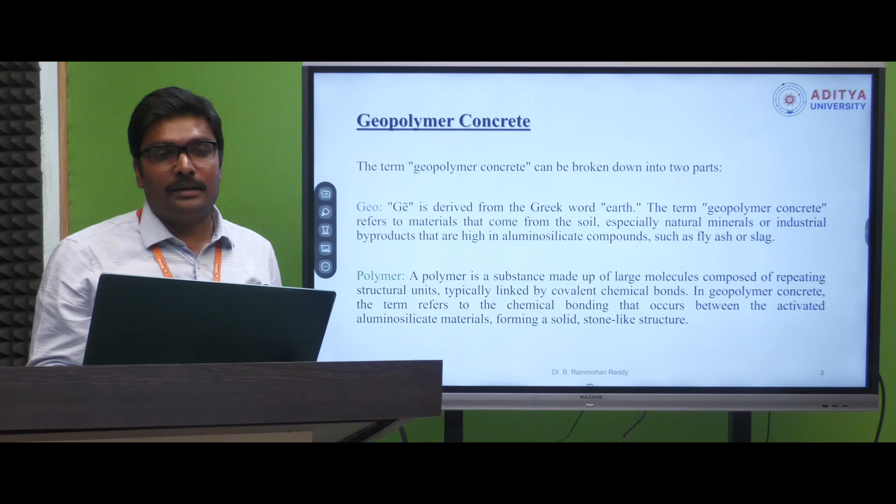And the second term indicates polymer. It's like a polymer substance made up of large molecules of repeating structural units, typically with covalent chemical bonds. In geopolymer concrete, the term refers to a chemical bonding that occurs between activated aluminosilicate materials, like industrial byproducts, to form a solid structure like stone. That's what together we are calling geopolymer concrete.

And these are the contents we are going to discuss in this presentation on geopolymer concrete.

Coming to the need of geopolymer concrete, cement is one of the most frequently used construction materials, and India's cement production has increased from 230 million tons in 2011-12 to 380 million tons in 23-24. So the production of cement has increased drastically, from 230 million tons in 2012 to 380 million tons.

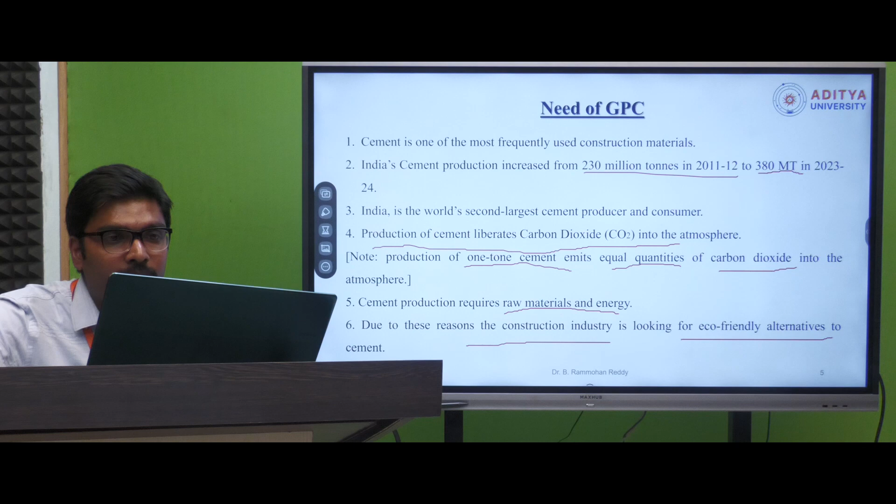India is the second largest cement producer, and production of cement liberates carbon dioxide into the atmosphere. 1 ton of cement production emits 1 ton, equal quantities, of carbon dioxide into the atmosphere. So the entire cement industry is looking for eco-friendly alternative materials to cement. Cement production also requires a lot of raw material and external energy, so the industry is looking for alternative cementitious materials. This flow chart indicates in how many stages the carbon dioxide is liberated into the atmosphere.

In the calcination process, we need to give external energy, and at that time carbon dioxide is released into the atmosphere. Second, grinding the clinker also requires external energy, and at this stage too carbon dioxide is released. Put together, these two stages mean around 1 ton of cement production liberates an equal quantity of carbon dioxide into the atmosphere.

Because of these environmental concerns, the cement industry is looking for alternative cementitious or binding material required to produce concrete. Most researchers suggest geopolymer is one such alternative material to conventional concrete.

As civil engineers, we should be concerned about global warming. We need to mitigate it, and geopolymer will be that alternative substance to conventional concrete, to reduce global warming.

Coming to the introduction of geopolymer concrete: it is an innovative, eco-friendly construction material that replaces cement in concrete. In some concretes like PPC concrete or slag concrete, we can replace only a part of the cement. But in geopolymer concrete, we can replace the binder, cement, 100% with an industrial byproduct or industrial waste material. Also, the hydration process that occurs in Portland cement requires water.

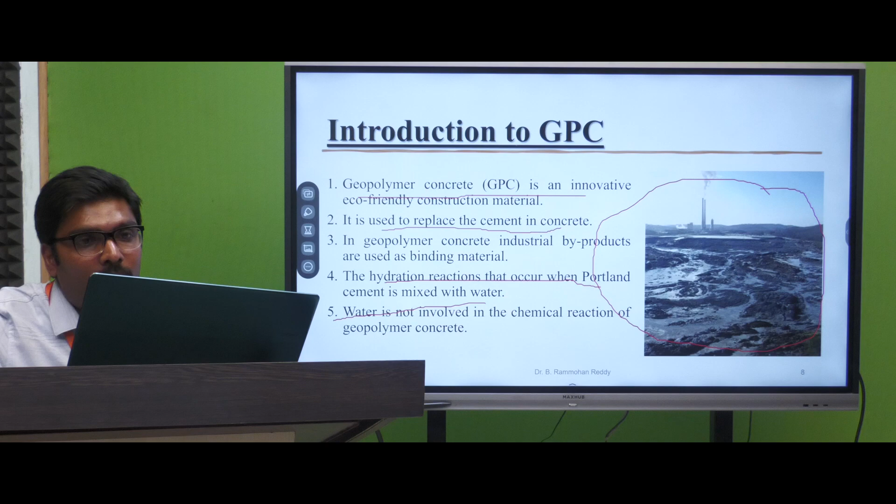If you see this diagram, this is an ash pond. The image is taken at one of the NTPC, National Thermal Power Corporation sites, where you can see fly ash being dumped on open land, creating environmental issues like polluting the ground, surrounding vegetation, groundwater, surface water, and air. So utilizing fly ash in a sustainable way, geopolymer concrete is the solution for it.

According to the literature, Professor Joseph Davidovits introduced geopolymer concrete in the 1970s. In a paper titled 'Geopolymer Cement,' he used different types of geopolymer cements with different industrial byproducts, and concluded that fly ash based geopolymer cements reduce CO2 emission by up to 90%, because we are not using ordinary Portland cement here, we are using fly ash as a replacement to produce concrete, so that we can control the emission of carbon dioxide into the atmosphere.

In another study on mechanical properties of fly ash based geopolymer concrete under oven and ambient curing, it was concluded that 100% fly ash based geopolymer samples showed better properties under elevated temperature. Most researchers present that 100% fly ash based geopolymer concrete gives better results at an elevated temperature of 40 to 80 degrees centigrade.

In another study on long term and short term properties of geopolymer concrete, it was concluded that higher concentrations of sodium hydroxide solution resulted in higher strength and durability compared to OPC. So the concentration of NaOH also plays a major role in attaining enhanced strength and good durability properties in geopolymer concrete. Many researchers have thus elevated geopolymer concrete as an effective alternative to conventional concrete.

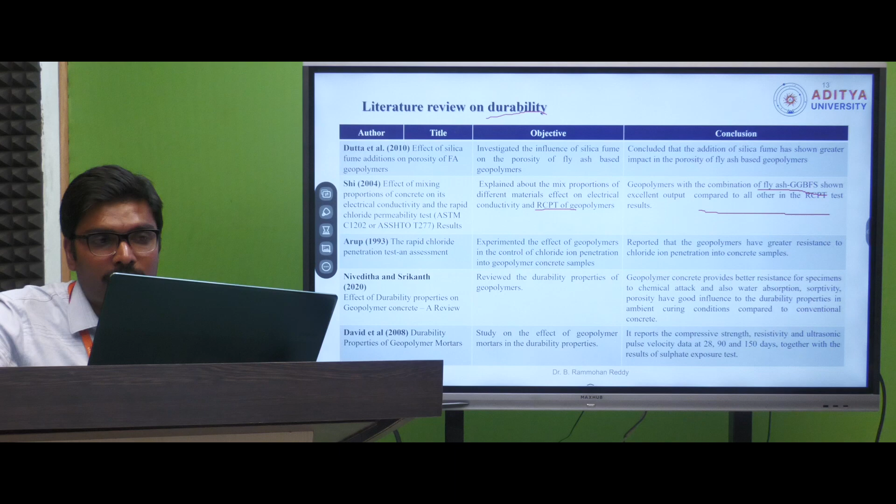And how all these factors will affect the microstructural studies will be presented by various authors, and how the formation of NASH and CASH gel, all these things we will see in the coming slides. And what are the durability properties? Not only short term strength, most of the studies show geopolymer concrete will produce better durability properties compared to conventional concrete. They presented RCPT results, and concluded RCPT results are good when fly ash is combined with GGBS in the production of geopolymer concrete. Many authors have clearly explained the durability properties of geopolymer concrete are much better compared to conventional concrete. So similarly, what are the practical applications?

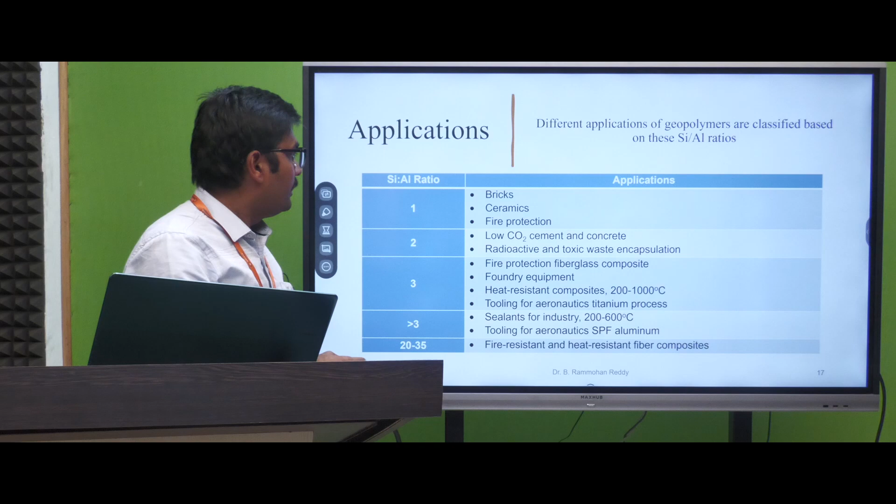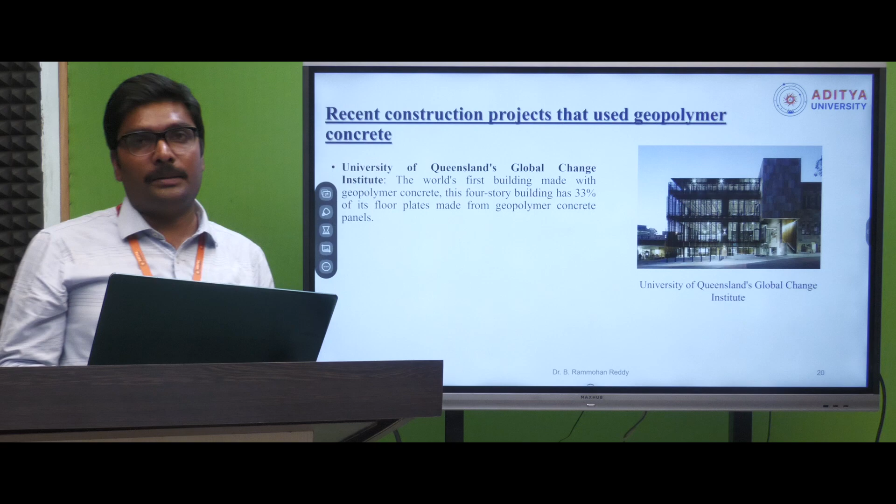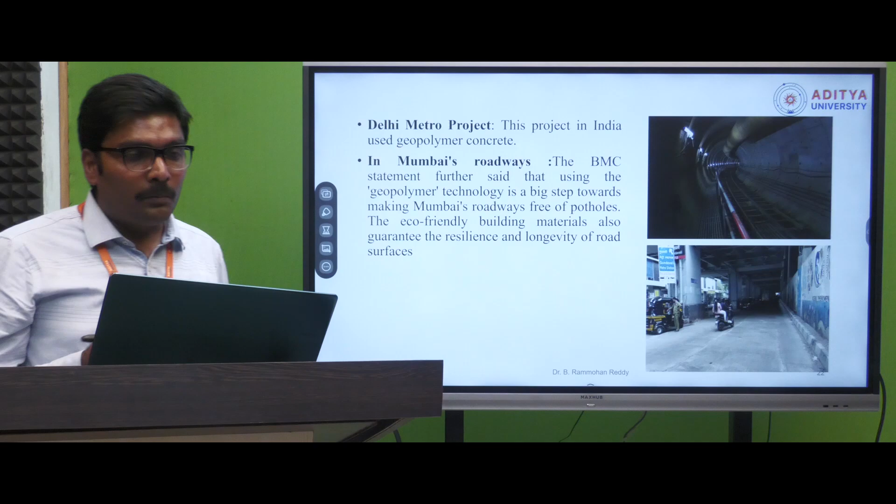Most researchers are confused about the difference between alkali activated concrete and geopolymer concrete. Davidovits clearly explained that geopolymer concrete is different and alkali activated concrete is totally different, because the binders used in alkali activated concrete are industrial byproducts such as fly ash, slag, metakaolin. But in geopolymer concrete, we use aluminosilicate materials, materials which are rich in aluminosilicate. The activator solutions are the same, either sodium based solutions like sodium silicate, sodium hydroxide, or potassium based solutions, potassium silicate and potassium hydroxide, used as activator solutions. Similarly in GPC also we use these.

In the activation process, these key points play a major role. Dissolution of silica and alumina from the industrial byproducts chosen will play a major role and produce a cementitious matrix, through polymerization and gelation. But here we call it a 3-dimensional aluminosilicate network. So simply we call it geopolymerization, and it will produce a rigid amorphous to semi-crystalline network.

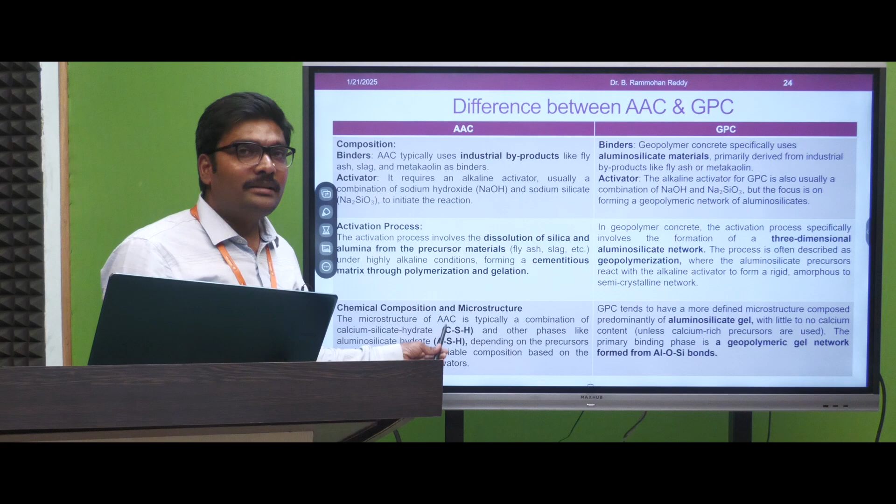Chemical composition and microstructure: if you see the difference between AAC and GPC, CASH and NASH gels will form. CASH is nothing but calcium silicate hydrate, where if you use slag or calcium rich materials as binders, then CASH gel will be produced, which we can identify through microstructure. And NASH, where we use silica and alumina rich materials, NASH will be produced. Similarly, in the microstructure we analyze the geopolymer gel network that is formed from alumina and silica bonds. That is the major difference in the microstructure of geopolymer and alkali activated concrete.

Coming to the difference between ordinary Portland cement and geopolymer cement. This is a major point everyone should know. The various points I have presented here.

For binding material: in geopolymer concrete, alkali activated aluminosilicates like fly ash, slag or industrial byproducts are used as the binding material. In conventional concrete, ordinary Portland cement is the binder.

The primary ingredients used in geopolymer concrete are industrial byproducts such as fly ash, ground granulated blast furnace slag, and alkali activators such as sodium based or potassium based materials. In conventional concrete, we use cement, natural or artificial aggregates, water, and admixtures for better workability.

Regarding CO2 emissions, a major advantage why people are looking for geopolymer concrete is its environmental benefit - carbon dioxide emissions are significantly lower due to absence of cement, compared to ordinary Portland cement.

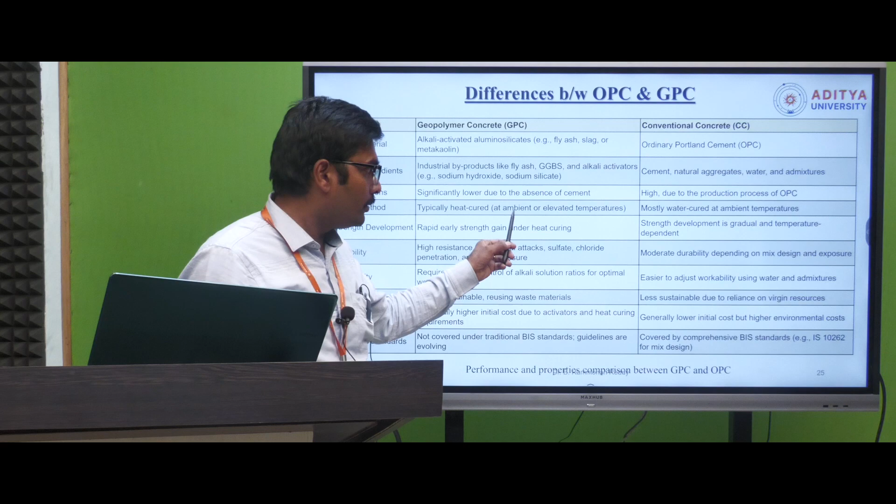For curing method, in geopolymer concrete curing plays a major role in attaining strength. We can go for either ambient temperature or elevated temperature curing based on environmental conditions and the place of production. The binders used also help decide whether we go for ambient or elevated temperature curing. But with OPC, we need to go for water curing in most cases.

Strength development in geopolymer concrete is rapid, and early strength is attained with heat curing. In conventional concrete, strength development is gradual and also temperature dependent.

Coming to durability, compared to conventional concrete, geopolymer concrete has better resistance to chemical attack, chloride penetration, and acid exposure. So geopolymer concrete produces better durability.

Coming to workability properties, there are many factors that can increase or decrease workability in geopolymer concrete. In conventional concrete, we can adjust workability by adding admixtures or additional water content.

Compared to conventional concrete, geopolymer concrete is more sustainable because we use industrial waste materials in its production. Cost is also one of the important factors people look for.

The initial cost of geopolymer concrete is a little high because activator solutions need to be purchased, while the initial cost of conventional concrete is less. But since geopolymer concrete is more durable, in the long run we can reduce maintenance costs.

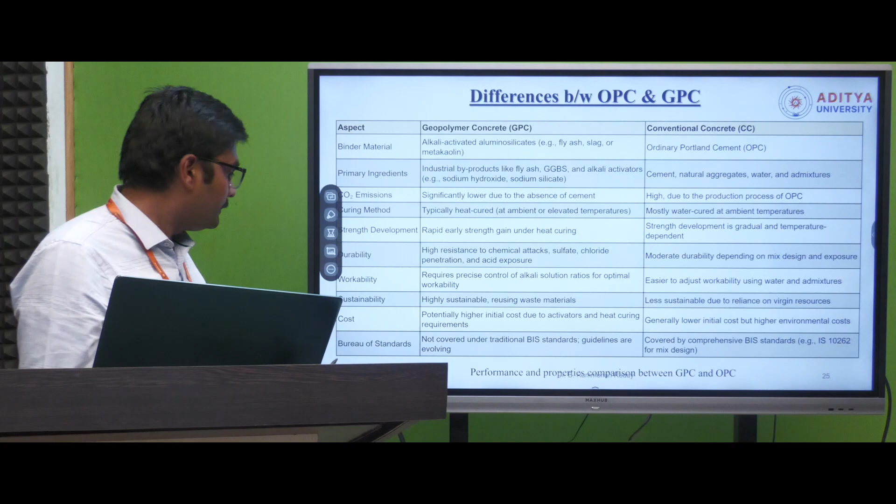Coming to standards, for geopolymer concrete there is still no proper Indian standard guideline for mix design or other properties. But we all know IS 10262 is the standard for mix design of conventional concrete.

Regarding the importance and applications of geopolymer concrete, in the 1970s itself the term geopolymer was introduced by Joseph Davidovits, who presented that utilization of industrial byproducts would reduce carbon dioxide emissions produced during cement production. It is an environment friendly material, and the entire cement and construction industry is looking for such materials.

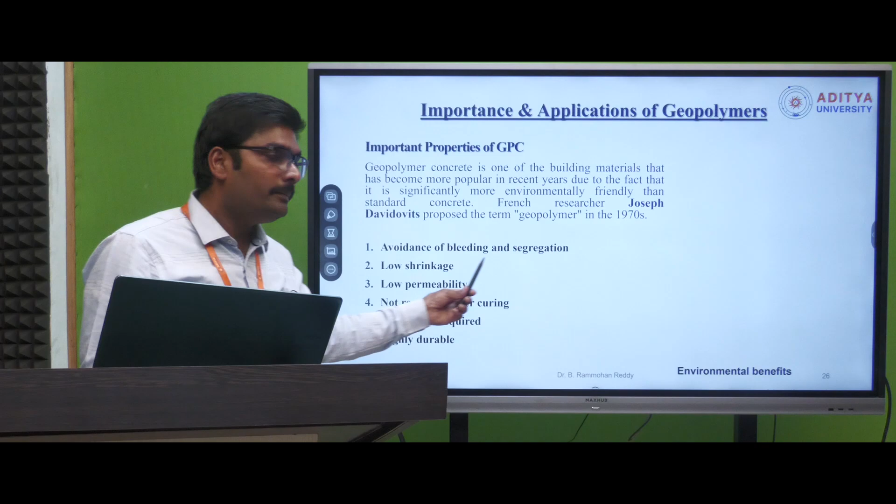By using geopolymer concrete, we can avoid bleeding and segregation, achieve low shrinkage, low permeability, and it does not require water curing. Strength can be achieved as required, based on the proportions of industrial byproducts and alkaline solution properties chosen. It is also highly durable compared to conventional concrete.

Coming to environmental concerns, geopolymer concrete reduces industrial waste, since in many industries waste is dumped on open land creating environmental issues, which can be avoided by utilizing that waste in concrete production. It is eco-friendly and sustainable, reduces carbon dioxide emissions, and thereby reduces global warming caused by cement production.

These are the materials used in the production of geopolymer concrete, as mentioned earlier - either sodium based or potassium based: sodium silicate or sodium hydroxide, potassium silicate or potassium hydroxide. Many researches present sodium based activators being used due to economic considerations, and these aluminosilicate materials are used as the primary binder material in geopolymer concrete production.

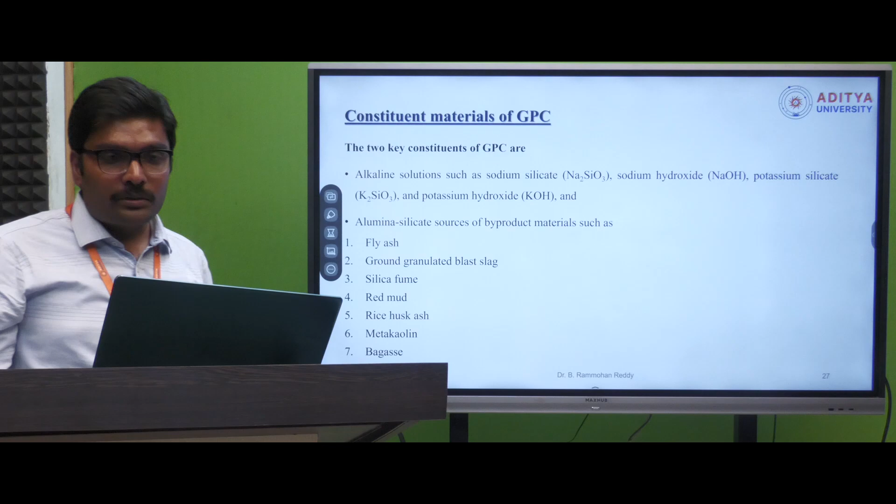So now we are going to see each and every industrial byproduct.

For example, fly ash, we all know fly ash is a byproduct which is produced in coal based thermal power stations, and it is rich in silica and also alumina, so that it is more suitable in the production of geopolymer concrete.

There are two classes of fly ash, class F and class C. Class F fly ash requires an activator to become a cementitious material, so that's what we are using here, the activator. Class F fly ash is a low calcium fly ash. Class C fly ash has self cementing properties because it has more calcium content, and it is a pozzolanic material.

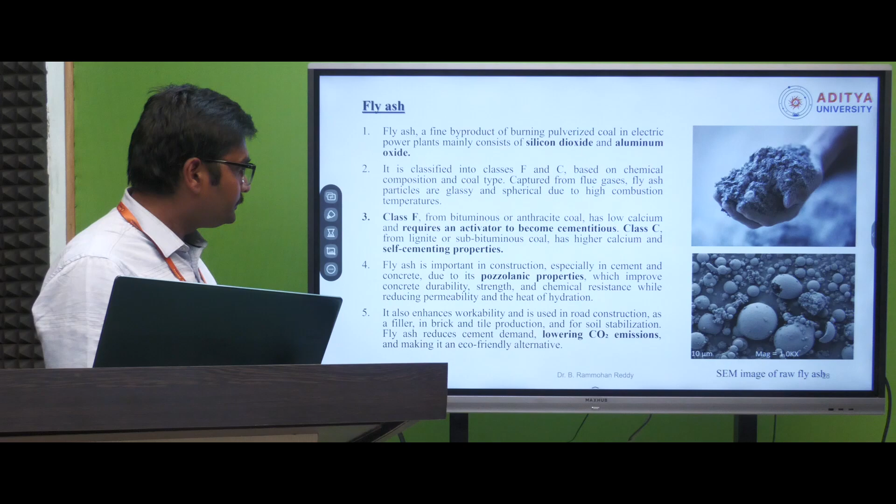By utilizing fly ash in the production of concrete, we are lowering the carbon dioxide emissions into the atmosphere and making the concrete an eco-friendly alternative to conventional concrete.

Coming to another industrial byproduct, ground granulated blast furnace slag, we can also call it GGBFS, or simply slag. It's like a glassy granular material ground into a fine powder, that's what we call ground granulated blast furnace slag. It is the byproduct produced in the making of steel, and we can utilize this byproduct in the production of geopolymer concrete.

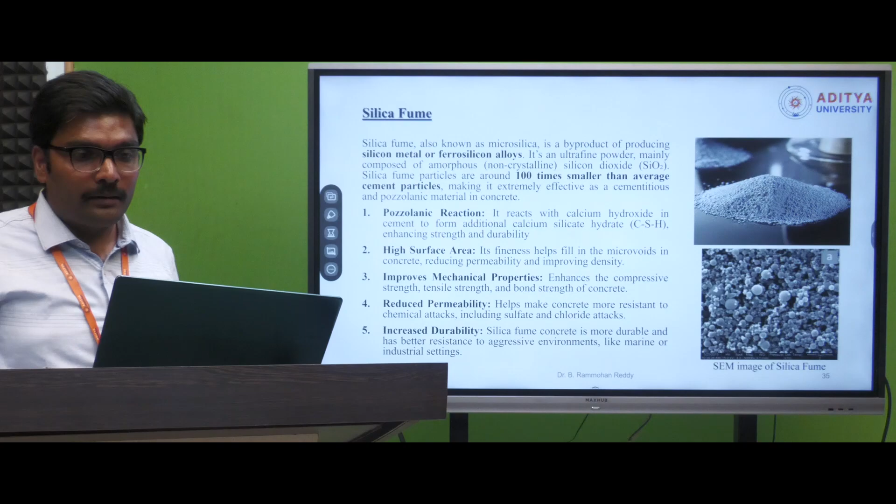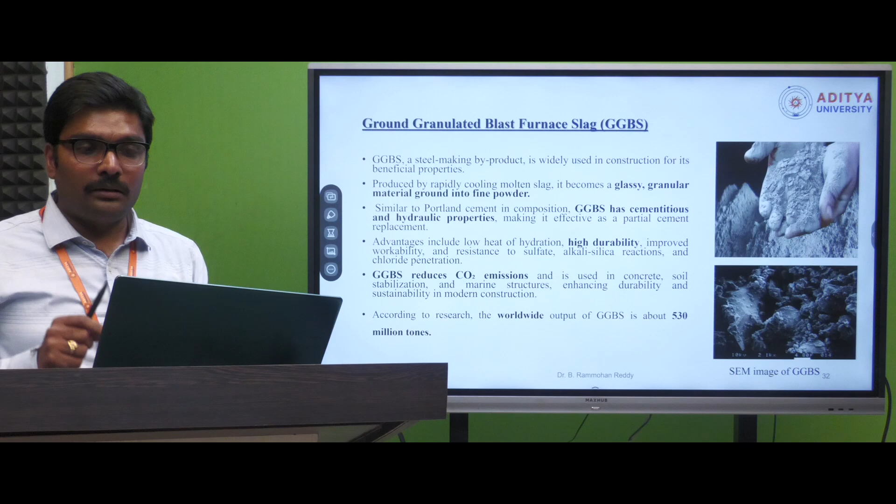So many researchers have found that the combination of fly ash and GGBS gives better results, because in between the fly ash particles, the GGBS particles will settle, and proper bonding is produced.

Coming to another industrial byproduct, red mud. It is from the bauxite residue in the production of alumina. Red mud is the waste material, and the utilization of red mud will give more environmental benefits, since environmental challenges are there. Red mud is one of the byproducts which we can use in the production of geopolymer concrete.

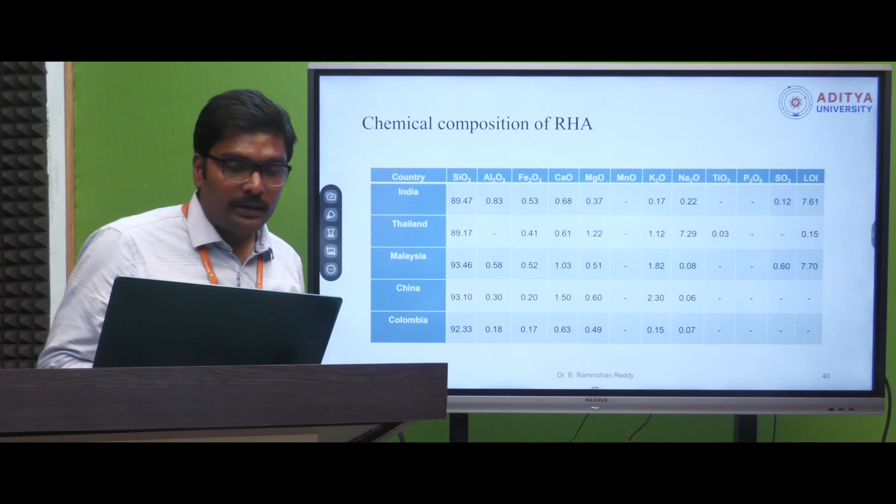It's an environmentally friendly material which we can use in the production of concrete. Looking at the chemical composition, silica content is more in rice husk ash.

Another byproduct, sugarcane bagasse ash, is the residue left after extracting juice from sugarcane. Utilizing this is also environmentally friendly, and it has pozzolanic properties because of high silica content, and the particle size and specific surface area of this material is high.

Particle size is less and specific surface area is high, so we can utilize this. If sugarcane bagasse ash is used in the production of concrete, it will give a durable structure.

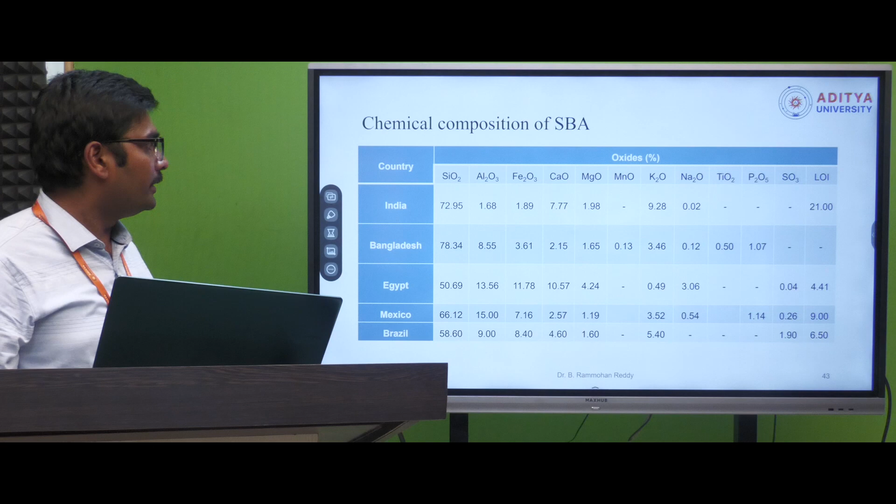The chemical composition of sugarcane bagasse ash shows silica content is more, and alumina content, iron content as well as calcium content is also more. This varies from country to country because of the sugarcane production.

So if you use these byproducts in the making of concrete as a partial replacement, it will give a better dense structure, so that automatically the strength and durability properties of the structure will be increased.

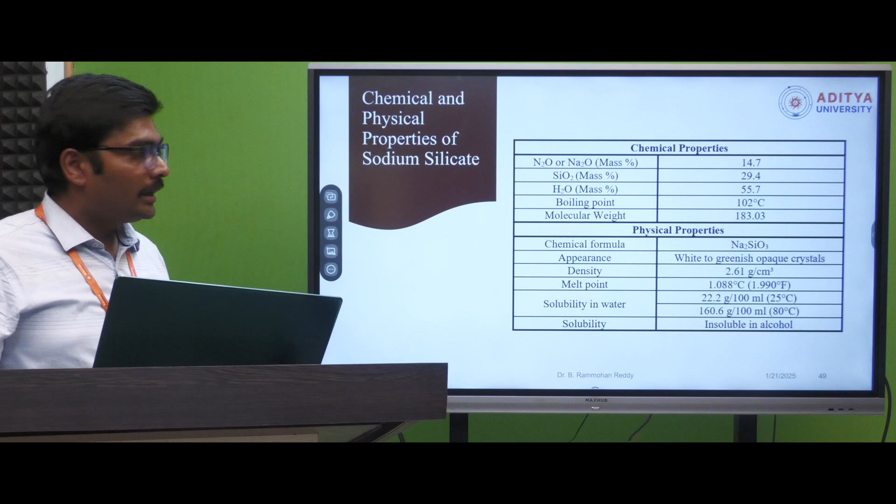This is the chemical and physical properties of sodium silicate. So Na2O mass percentage, SiO2 and water content, and the boiling point — all these factors we will see.

Now coming to molarity, in sodium hydroxide molarity plays a major role, as discussed in the previous slide. So if we need some molar, either 6 molar or 8 molar sodium hydroxide solution, how to prepare it you can see here. The concentration of alkaline solution is the factor, and sodium hydroxide has a molar mass of 40 grams per mole.

To produce a 12 molar solution, for example: 1 liter of water plus 40 grams of NaOH gives a 1 molar solution. Similarly, for 12 molar, we multiply 40 grams by 12, so 480 grams of NaOH pellets need to be added for 1 liter of water to produce a 12 molar solution. According to whichever molarity we need, we add the sodium hydroxide pellets accordingly.

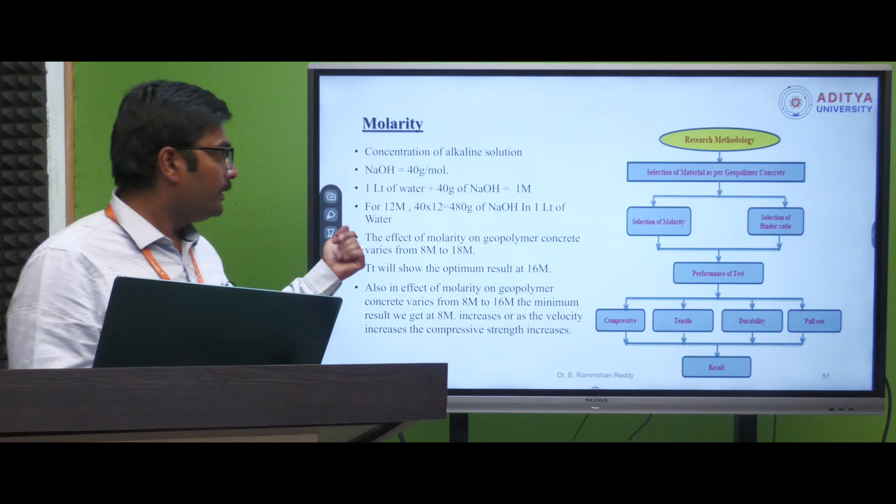But we need to take care while adding sodium hydroxide pellets, because it produces heat while adding, so it's better to check that and add carefully.

In this slide, water, sodium hydroxide and sodium silicate combine to give the alkaline solution. It produces heat up to 80 degrees Celsius, so we need to store this solution in a cool place, and while preparing the sodium hydroxide solution we need extra care and use it after 24 hours.

This is also a major point: if you plan to cast the samples today, or use geopolymer concrete in construction today, you need to prepare this alkaline solution 24 hours before.

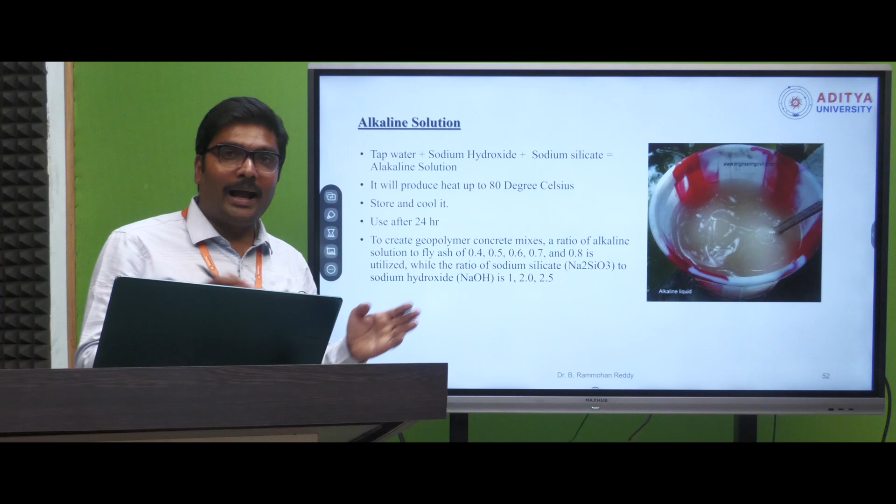While preparing the alkaline solution, first we decide the molar ratio of sodium hydroxide, and according to the molar we add water and sodium hydroxide pellets to produce the sodium hydroxide solution. Then we go to sodium silicate, adding it according to the proportion needed, either 1:1, 1:2, or 1:2.5, combining both sodium hydroxide and sodium silicate solutions to produce the alkaline solution.

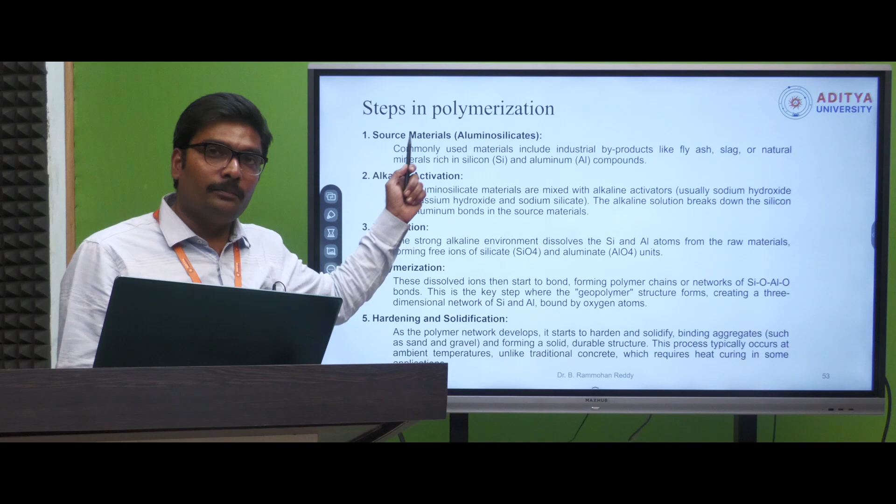This slide presents the steps in geopolymerization. Many researchers have highlighted the geopolymerization process, similar to how we study the hydration process in conventional concrete. In the same fashion, we need to understand geopolymerization, because strength is attained based on this process. The first step is source material selection.

In geopolymer concrete, we need to select source material rich in aluminosilicates. The second step is alkaline activation - the alkaline solutions we use, either sodium based or potassium based, play a major role in the formation of the geopolymeric chain.

The next important step is the dissolution stage. The strong alkaline solution dissolves silica and alumina atoms from the raw material. The raw materials we use, which are aluminosilicate byproducts, contain strong alumina and silica, and these release free ions of silicate and aluminate. In the next slide I will show how these free ions form.

The next stage is polymerization. The dissolved ions of silica and alumina rearrange and form bonds through oxygen atoms. A polymer chain forms as a network of silica oxide and alumina oxide. This chain bond formation is a crucial step for attaining strength.

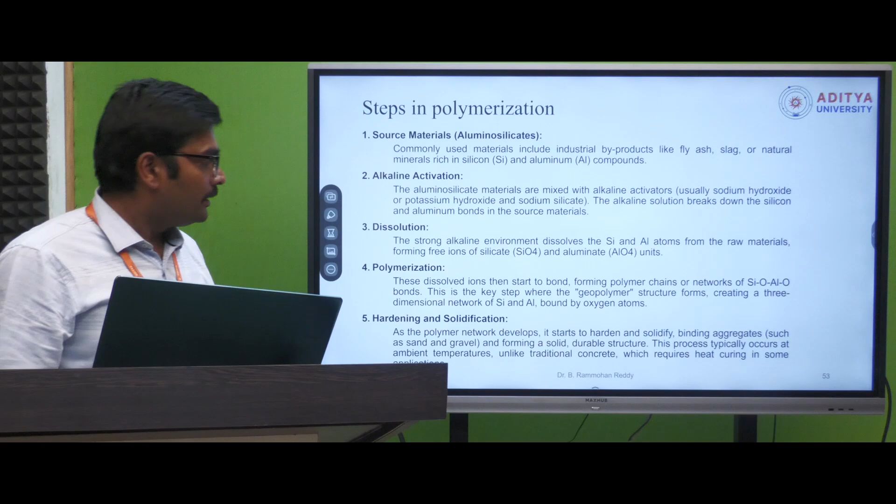Next is hardening and solidification. In this stage a three-dimensional geopolymeric network forms, producing a solid durable structure. This typically occurs at ambient temperatures as well as at heat temperatures. These are the different steps involved in geopolymerization.

In the next slide I will explain this more clearly along with the chemical formulas. The first two steps, selection of source materials and alkaline activator, we already know. The remaining three steps are the most important in the geopolymerization process.

In the dissolution stage, aluminosilicate precursors like industrial byproducts react with the alkaline solution and release silica and alumina monomer ions. The equations show the aluminosilicate forming alumina and silica monomers in this first stage. In the next slide I will also present a video for more clarification.

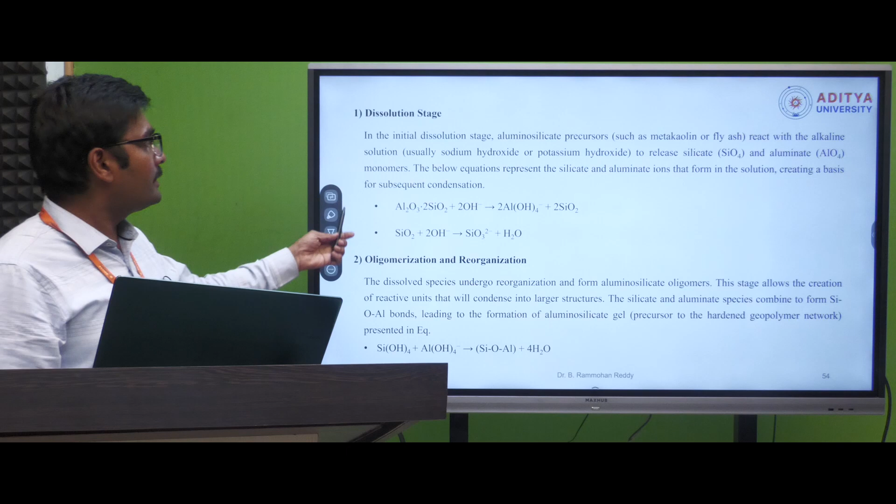In the second stage, oligomerization and reorganization, the monomers divided from the aluminosilicate material in the presence of alkaline solution rearrange to form silica and alumina bonds, creating a polymeric chain. That is what we call a geopolymer - a polymeric chain forms here.

In the next stage, this geopolymeric chain process forms a 3-dimensional network, which plays a major role in producing better durable concrete. These are the chemical reactions produced during this polycondensation, or hardening stage.

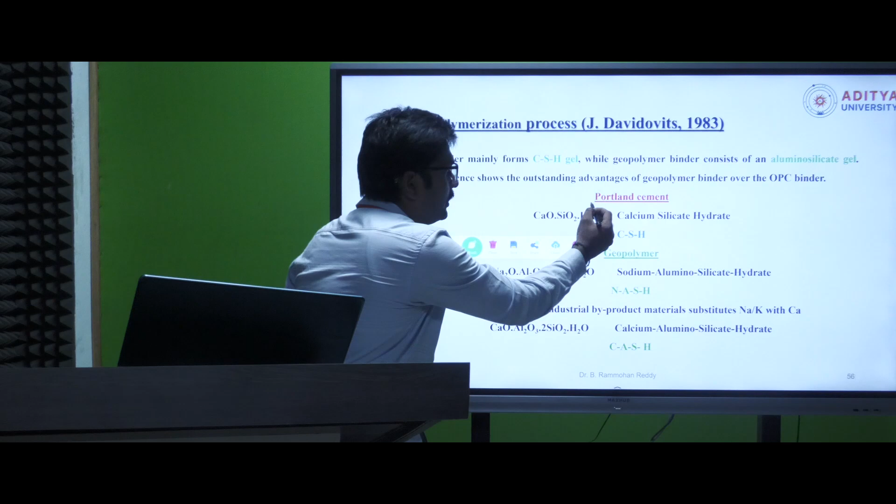This slide presents the geopolymerization process. We all know that in conventional Portland cement, calcium silicate hydrates play a major role in strength attainment. Similarly, in geopolymer concrete, based on the industrial byproduct we choose, either N-A-S-H gel or C-A-S-H gel will be produced.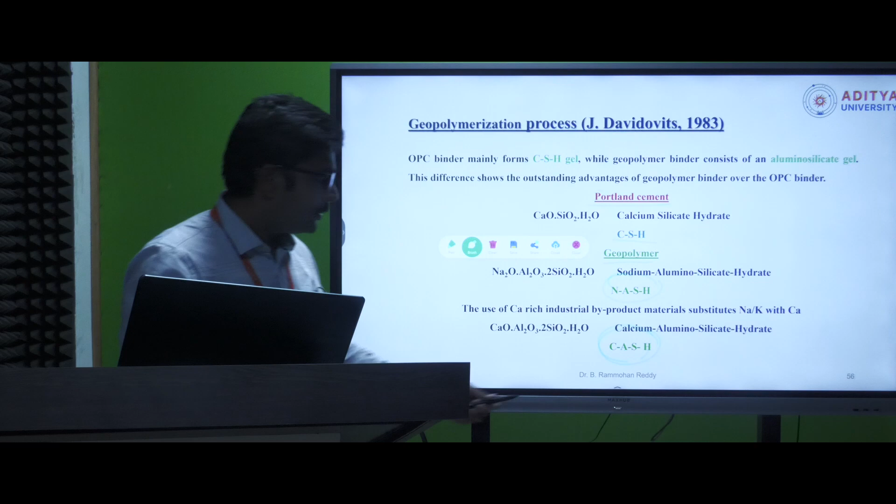N-A-S-H is sodium aluminosilicate hydrate. If you use more silica and alumina content as industrial byproducts, N-A-S-H gel will form. If you use more calcium along with silica and alumina based materials, C-A-S-H gel will produce. For example, using more quantity of GGBS in geopolymer concrete production leads to C-A-S-H formation, while using more fly ash, rice husk ash, or other alumina-silica content based materials leads to N-A-S-H gel formation.

Regarding the structure of polysialate in geopolymer concrete, the silica and alumina ratios play a major role in the formation of this chain network. If the silica to alumina ratio is 1, meaning equal ratios, polysialate will form through silica and alumina bonds.

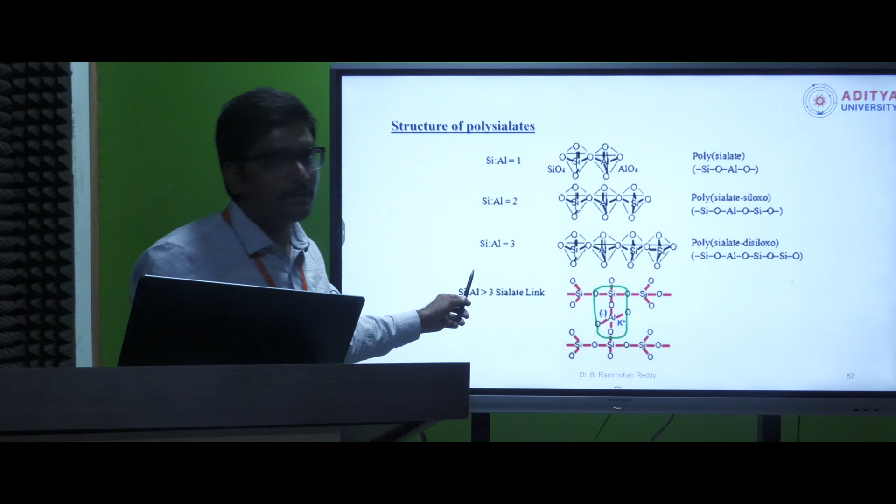If we use a Si/Al ratio of 2, then polysialate-siloxo will form, and if the Si/Al ratio is 3, then sialate-disiloxo will form. Based upon the silica and alumina ratios, different structures will form. In the next slide I will present how to find these silica and alumina ratios.

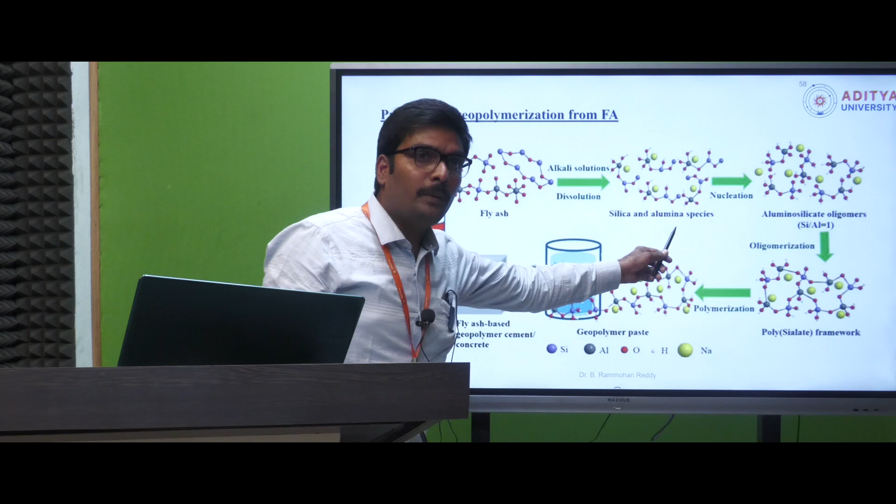This is the entire geopolymerization process as we discussed. As aluminosilicate materials undergo dissolution, silica and alumina species divide and then rearrange. Aluminosilicate oligomers rearrange and, based upon the Si/Al ratios, form a 3D network through polymerization, producing geopolymer concrete.

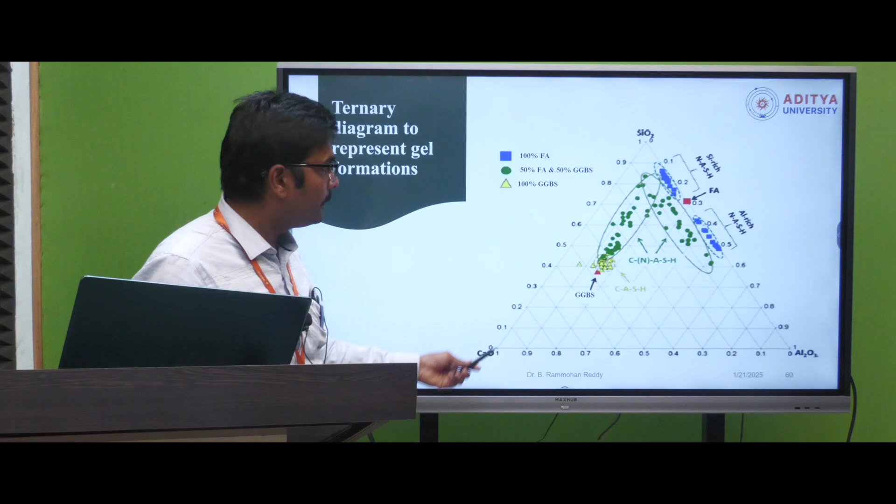The ternary diagram will represent the gel formations based upon the industrial byproducts we are choosing. If 100% fly ash based, you can see this blue indication, Nash gels - if it is silica rich and alumina rich, Nash gels will form. If you are using 50% fly ash and 50% GGBS, meaning silica, alumina and calcium rich materials, then you can see this green color, so either Cash or Nash will form. And 100% GGBS, the calcium rich based materials, then this yellow color indicates the Cash gels will form here. So this ternary diagram indicates how the gels are producing through the industrial byproducts or combination of byproducts.

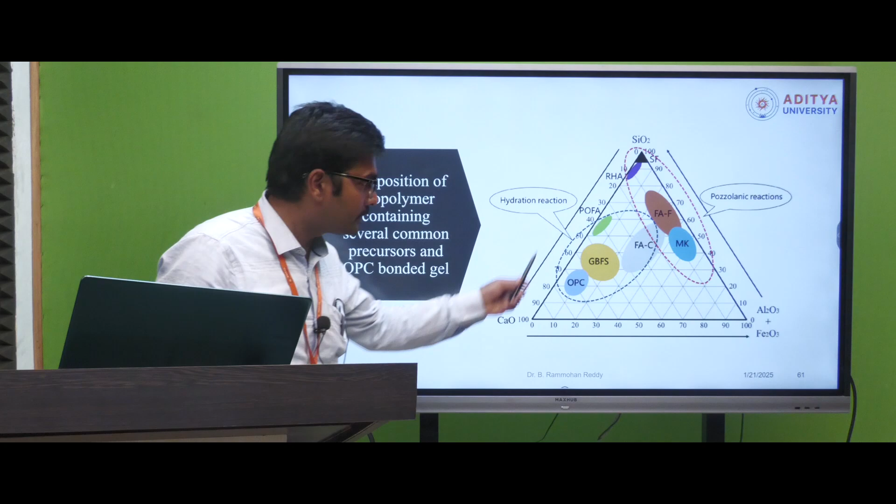Similarly, the several combinations of how the combination will produce the polymeric reaction will also be presented here. This is also a ternary diagram, whether we are going to use silica rich materials, or silica alumina based rich materials, or silica alumina and iron rich materials, or calcium and silica rich materials. Based upon that, it may be a pozzolanic reaction or hydration reaction.

And for making geopolymer concrete, you have already seen many materials. In the next slide I will explain this.

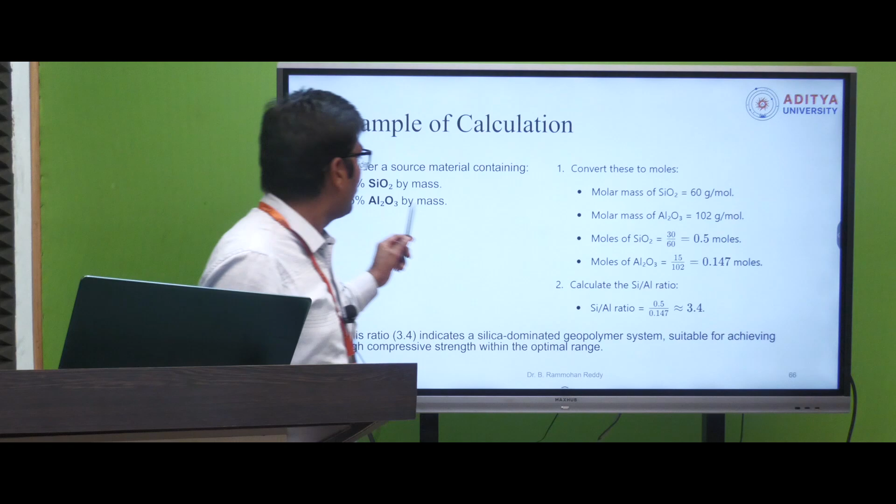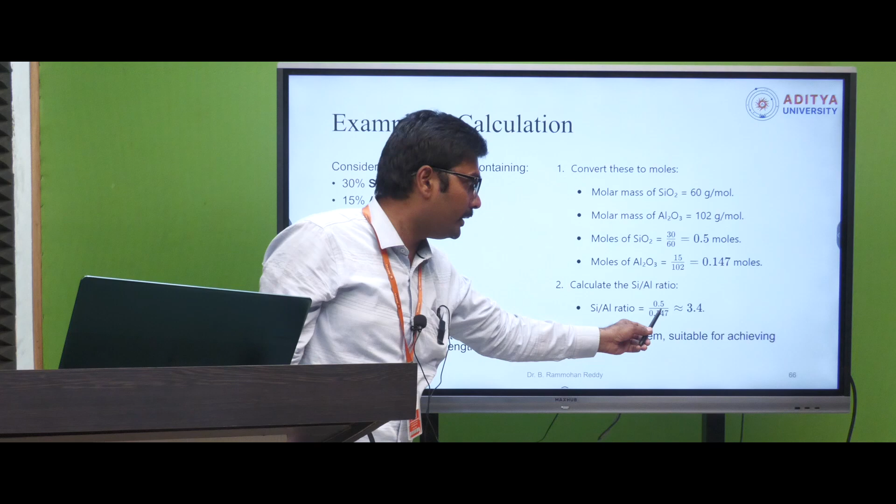Then to find these moles of SiO2: the silica content by mass is 30% in the primary binder we are choosing, that is 30 divided by the molar mass 60, giving 0.5 moles. Similarly for alumina, 15 is the mass percentage and molar mass is 102, giving 0.147 moles. Then to calculate Si by Al ratio: Si moles is 0.5, alumina is 0.147, so the Si by Al ratio is

3.4. This 3.4 indicates a silica dominated geopolymer system, meaning silica content is more here, so it is suitable for achieving high compressive strength within the optimal range. So with high silica content, if silica dominates alumina, the geopolymer will produce more mechanical and durability properties - enhanced properties of the geopolymer concrete.

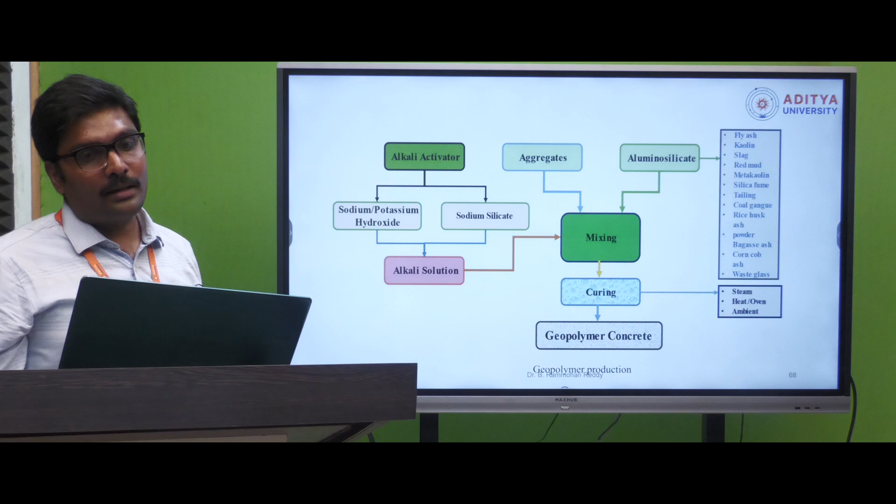This is the flow chart of how geopolymer concrete is produced. It's like conventional concrete, only the difference is instead of cement we are using aluminosilicate binders like industrial byproducts, and the activator solution is sodium based or potassium based. Rest of the things are common.

If you see a small model on a single slide, it shows everything going on: material selection, what materials are required for production of geopolymer concrete, preparation and mixing, choosing a proper curing condition, fixing the binder to activator solution ratio, and other factors in the mixed proportion. This is the design of geopolymer concrete, and it will be over.

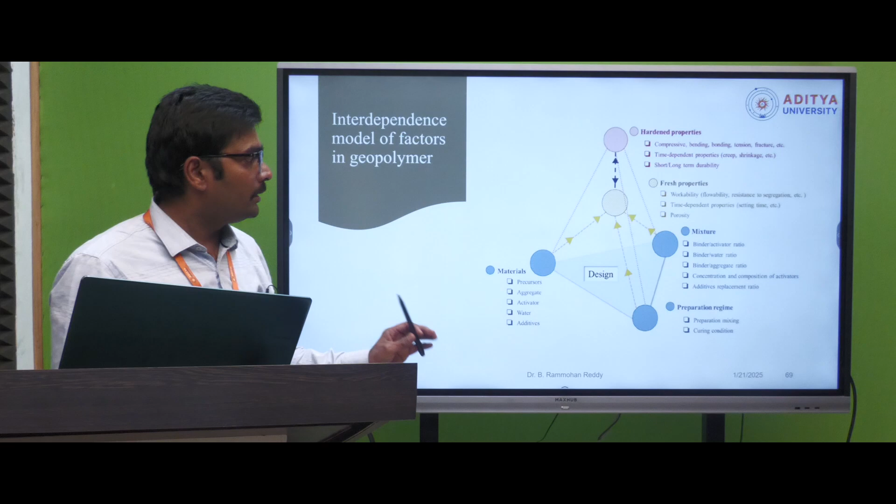Then we are going to find the fresh properties. After that we are going to find the hardened properties, either short term or long term. So the images will indicate the production of geopolymer concrete.

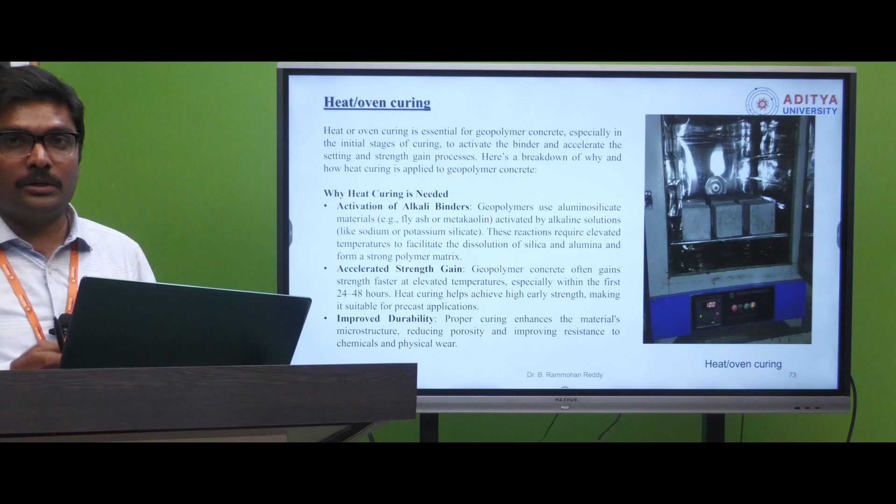As I mentioned, we can follow different curing methods, either heat curing, oven curing, steam curing, or ambient curing. These are the curing conditions. Most researchers state that oven curing is predominantly preferable at low temperature conditions. At the same time, if fly ash is the only byproduct used in making geopolymer concrete, or else conventionally, ambient curing is enough.

So that's what this slide also presents: geopolymer concrete requires heat curing. Yes, in case we are using fly ash based geopolymer concrete, where fly ash is the only industrial byproduct used, then it is required. Why is it required? For activation of fly ash particles. To activate the fly ash particles, heat curing is required.

To enhance the polymerization reaction, it requires heat, typically between 40 and 80 degrees Celsius, and also reduces the setting time, since fly ash will take more time for initial setting. To reduce that, we can go for heat curing, which also improves the mechanical properties. If you use oven curing or heat curing for fly ash based geopolymer concrete, it will produce better mechanical properties.

Until now we have seen how geopolymer concrete plays a major role in reducing environmental problems, how it is an alternative to conventional concrete, what mixing process we use, what the geopolymerization process is, and what reactions take place. These things we have seen.

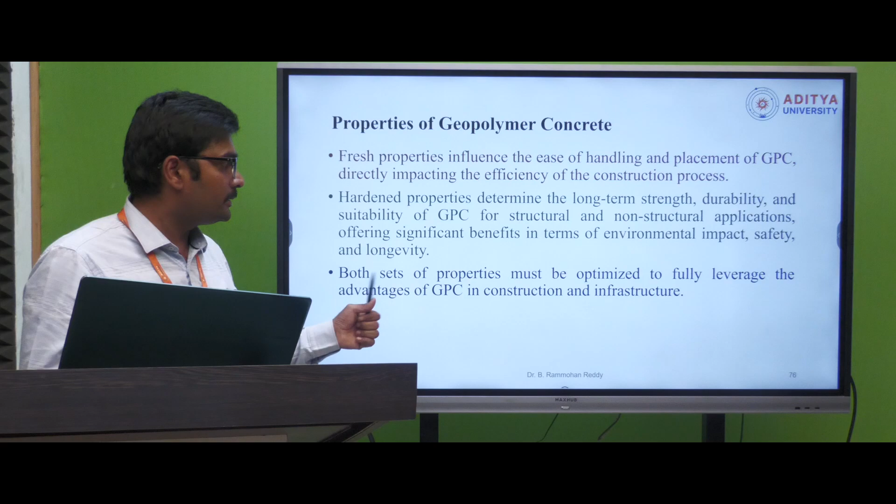Now coming to the properties: fresh properties, hardened properties, durability properties, we will see, and we can find these as in conventional concrete codes, so similar codes we can use here to find the fresh and hardened properties of geopolymer concrete. Some images will indicate how to find the initial and final setting time, workability, compressive strength, splitting tensile strength, and also flexural strength of the concrete.

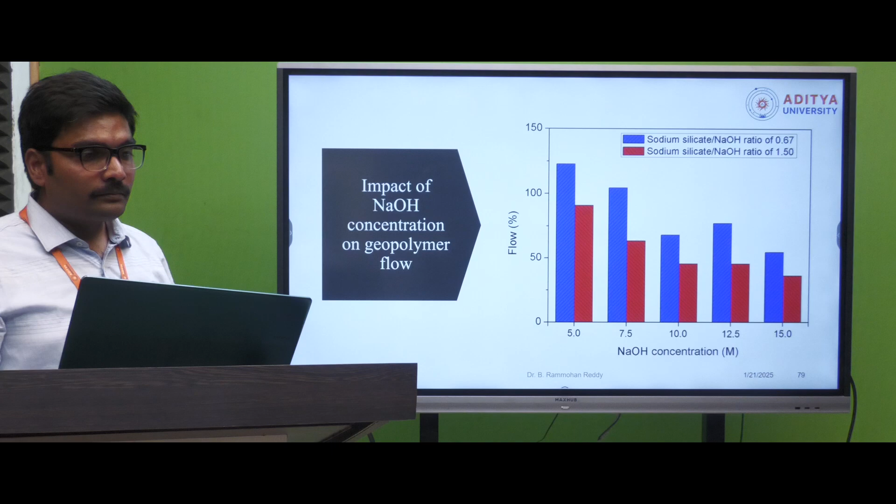Similarly for flow percentage, considering the NaOH concentration, the molarity of NaOH also plays a major role. If molarity is 5, you can see a better flow percentage. As the concentration or molarity of NaOH solution increases, the flowability is reduced for the geopolymer concrete.

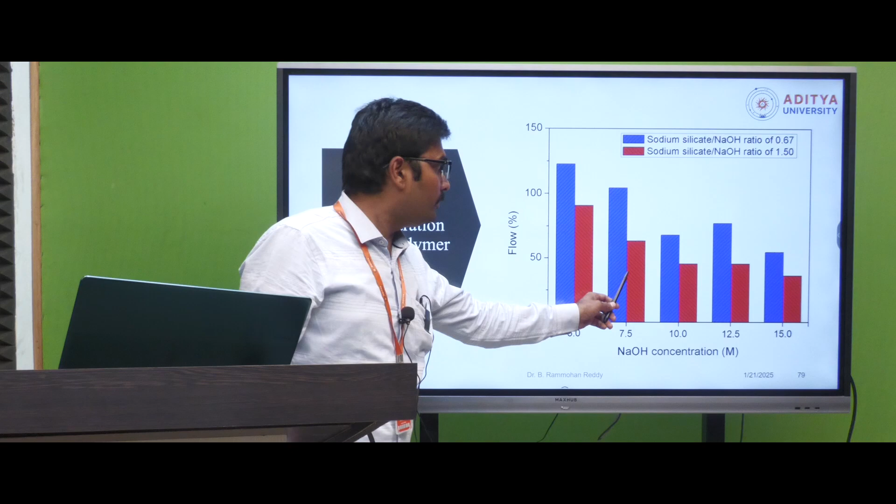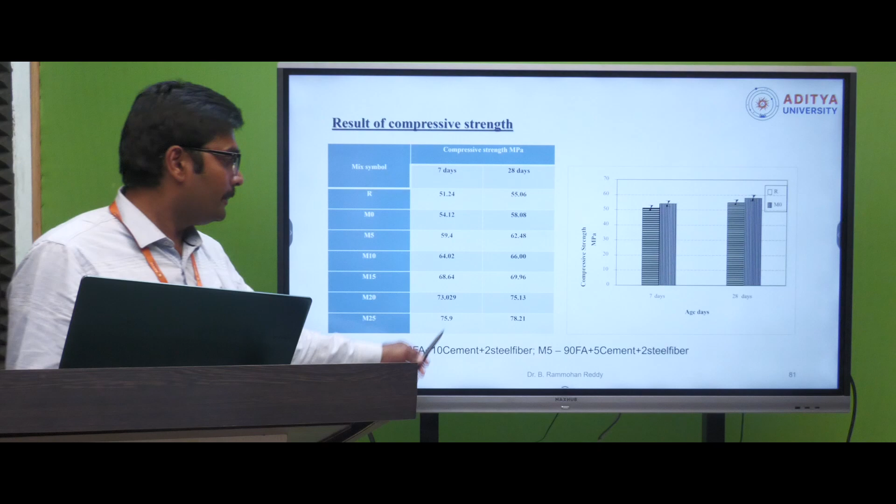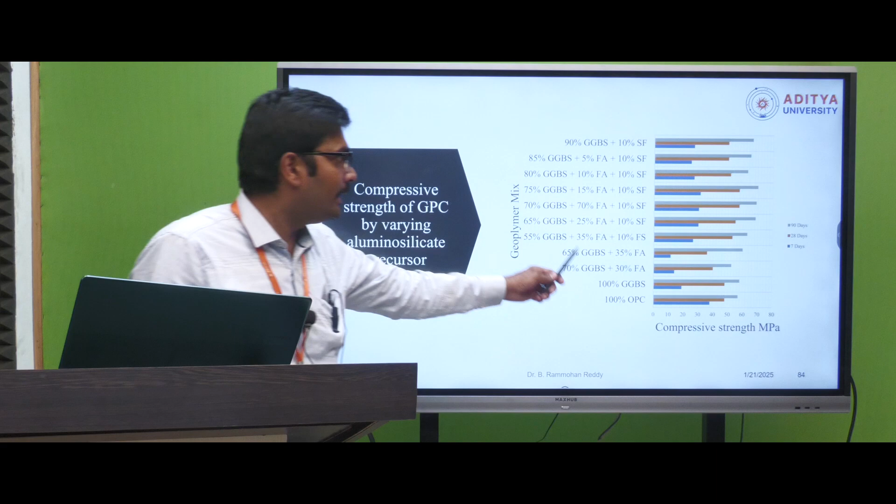Similarly, the same author presented splitting tensile strength, showing how it increases by replacing cement, and also flexural strength. Another author presented compressive strength for 100% ordinary Portland cement as a control mix, 100% GGBS, and 70% GGBS with 30% fly ash. Various combinations and how strength varies were presented in this diagram.

Finally, he concluded after doing compressive strength tests for 7, 28, and 90 days, that 75% GGBS, 15% fly ash, and 10% silica fume produced better compressive strength. That was presented by one of the authors.

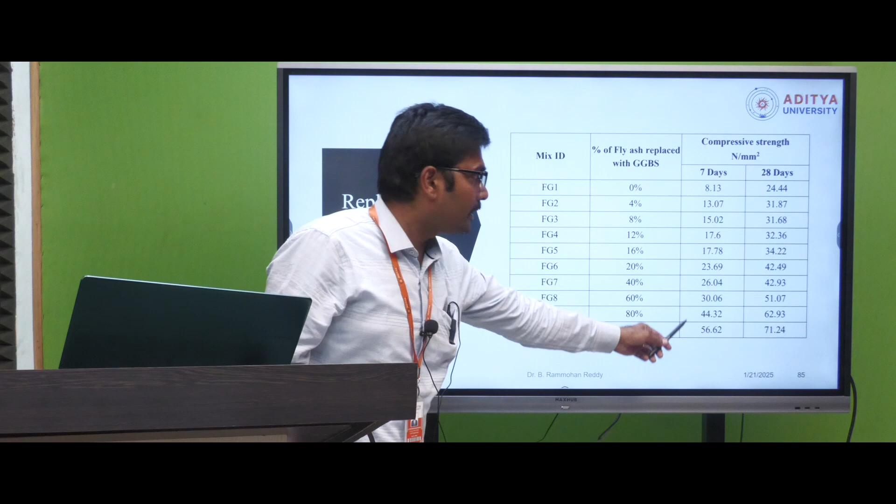For replacement of fly ash with GGBS, this table indicates fly ash replaced with GGBS at 0%, 4%, 8%, increasing up to 100%. He concluded, as shown by these values, that 100% GGBS based mix gives better compressive strength for 7 days as well as 28 days compared to other mix proportions.

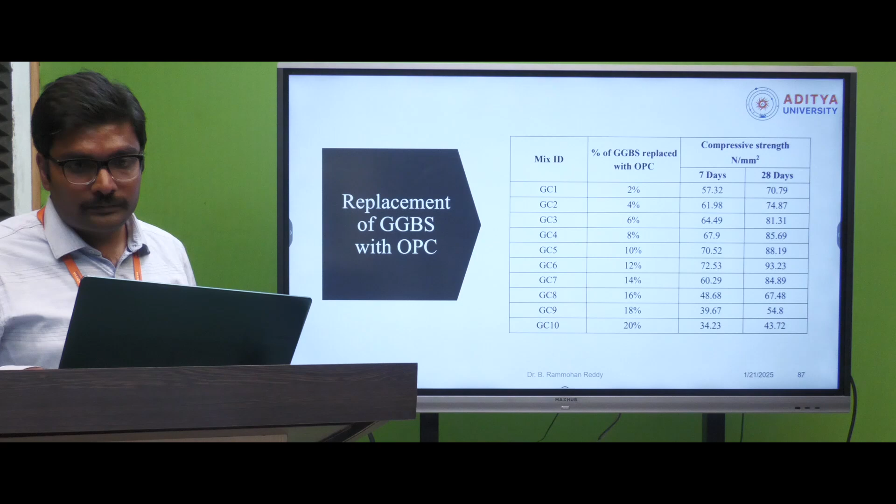Similarly, another attempt involved replacing GGBS with OPC. A 12% replacement of GGBS with OPC gave better compressive strength results, which is the GC6 mix.

One author presented geopolymer concrete at different molarities—12, 14, and 16 molar NaOH solution—and also at different curing conditions like oven curing and sunlight curing. He presented that, compared to sunlight curing, oven curing gives better compressive strength results.

In another study, the compressive strength of geopolymer concrete was presented for 3, 7, 14, 28, 56, and 90 days, under different curing conditions like open air curing and 60 degree oven curing. Compared to open air curing, 60 degree oven curing produced better compressive strength values, as you can compare here, and also at different proportions, for example 90% fly ash, 10% silica fume with 12 molar solution. All these used 12 molar NaOH solution, with different proportions and combinations of fly ash and silica fume presented here.

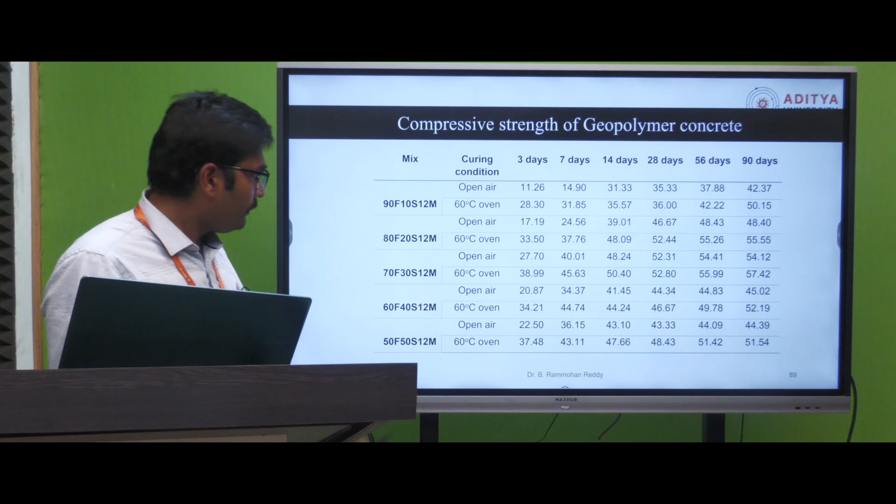He presented 50% fly ash and 50% silica fume based samples. Compared to these samples, 70% fly ash and 30% silica fume based samples gave better compressive strength results compared to all other mix proportions. This is one of the studies highlighting compressive strength values.

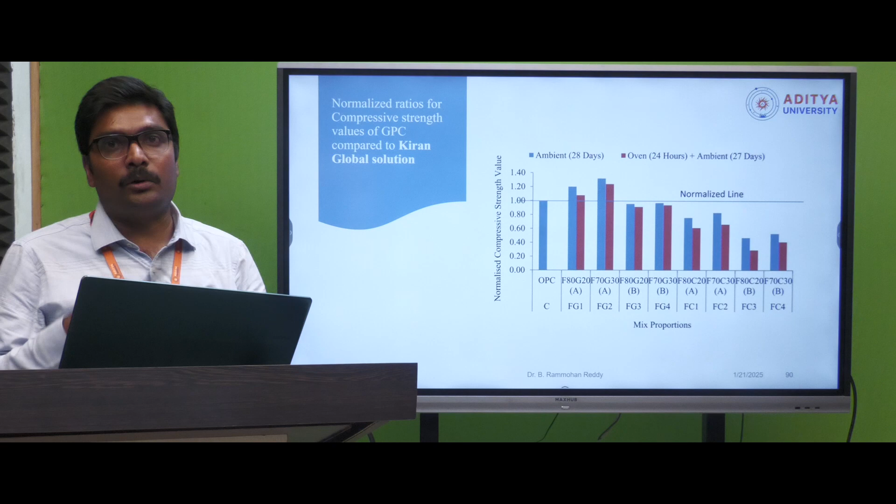This differentiates alkaline solution produced in the lab versus alkaline solution purchased from outside. The alkaline solution is available commercially, like Kiran Global Solutions producing alkaline solution. These mixes present alkaline solution produced in the lab versus alkaline solution purchased commercially for production of geopolymer concrete. These two graphs indicate at different proportions, like 80% fly ash and 20% GGBS, and 70% fly ash and 30% GGBS, produced with conventional alkaline solution made in the laboratory gave better strength values in ambient and also in oven curing.

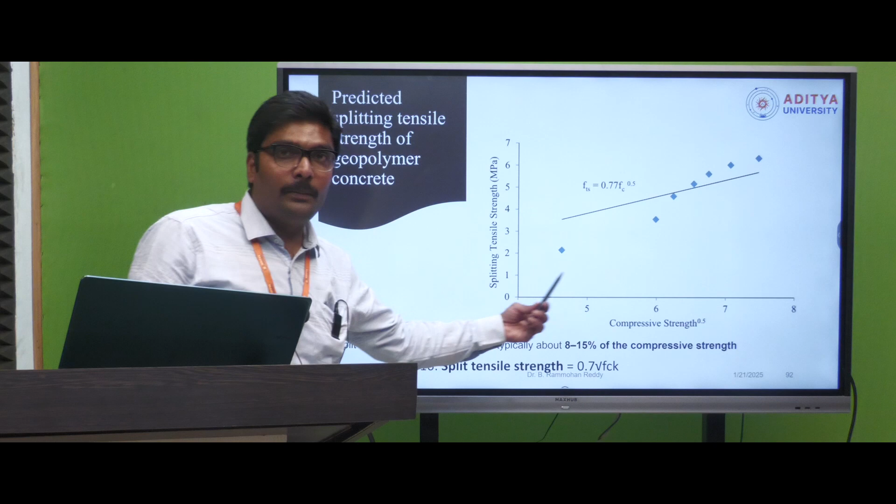Similarly, for the predicted splitting tensile strength equation, we generally know according to IS 5816 that splitting tensile strength is calculated as 0.7 root FCK, derived from the compressive strength of the concrete. One attempt for geopolymer concrete gives 0.77 root FCK, and for flexural strength, it is 0.98 root FCK.

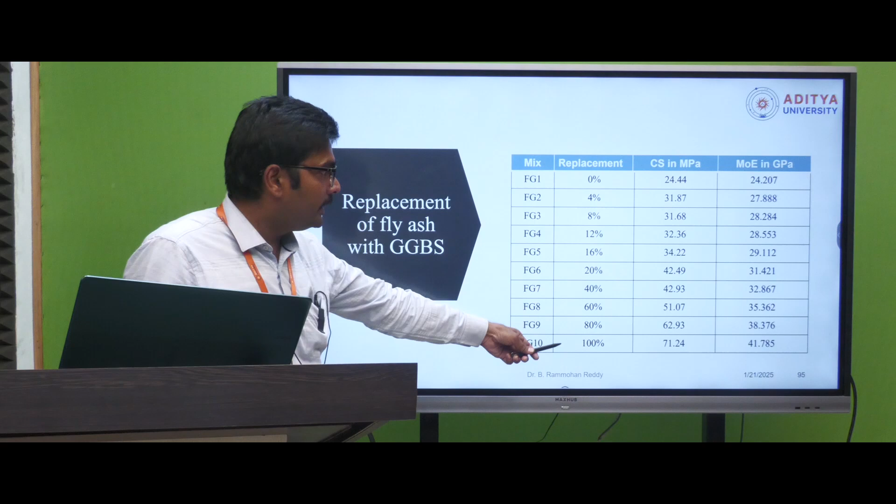This diagram indicates how to find the Young's modulus or modulus of elasticity of the geopolymer concrete through the compressometer, and by the replacement of fly ash with GGBS, how the modulus of elasticity values change. The same mix with 100% replacement of GGBS produces better modulus of elasticity because of a more dense structure.

Another attempt examined modulus of elasticity of geopolymer concrete mix with varying fly ash and wood ash, where wood ash is used as a replacement for fly ash. The study found 70% fly ash and 30% wood ash gives better strength values for modulus of elasticity.

This is the equation proposed by one author. We all know the modulus of elasticity of conventional concrete is 5000 root FCK, but here in geopolymer concrete it is 3282 root FCK. The value may vary based on the proportions chosen for production of geopolymer concrete. But from this we can understand, and many authors state, that geopolymer concrete modulus of elasticity values are somewhat less compared to conventional concrete.

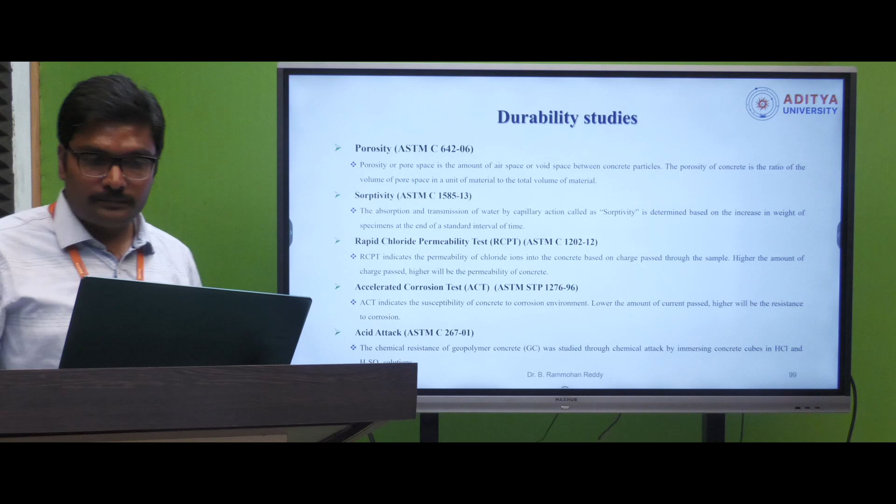A similar kind of study has found the modulus of elasticity of the geopolymer concrete. From here we can see the durability properties of geopolymer concrete, where we look at porosity, sorptivity, RCPT (rapid chloride permeability test), accelerated corrosion test, and different acid attack tests. Various codes are also mentioned. A similar slide shows the different characteristics of durability studies we can perform.

The water absorption is reduced once the GGBS quantity is increased in the geopolymer concrete, meaning replacement of fly ash with GGBS gives better, reduced porosity.

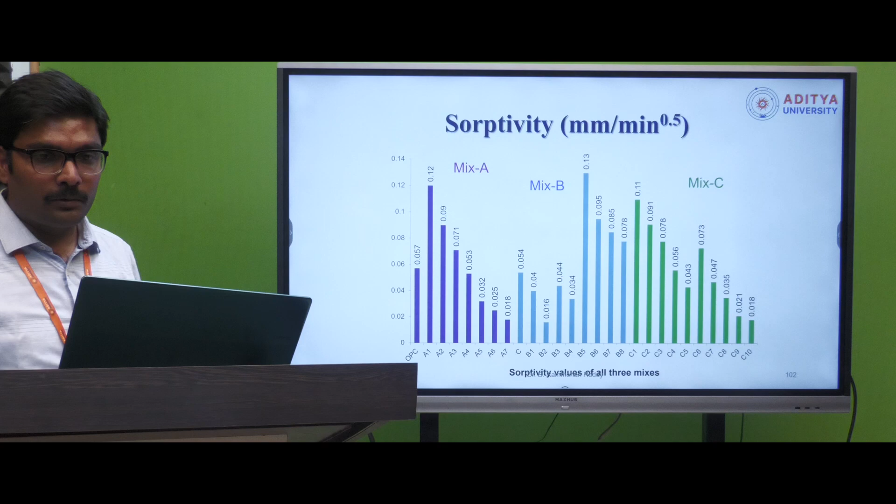An accelerated corrosion test, so you can see the schematic diagram here. The reinforcement bar is connected to a DC supply, and the surrounding bowl which we are using for the concrete specimen will be connected to the copper rod. Here we can use 6% NaCl solution.

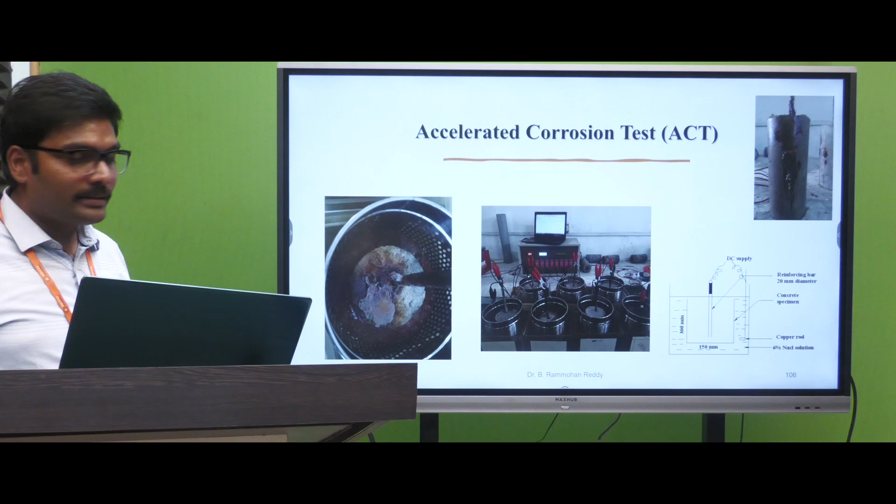So it indicates in geopolymer concrete, if you replace fly ash with GGBS, it will give better results in both strength and durability.

Another factor, if you would like to find durability through acid attack, we can find it through three factors: acid mass loss factor, strength loss factor, and dimension loss factor. By multiplying these three factors we can find the durability loss factor of the geopolymer concrete.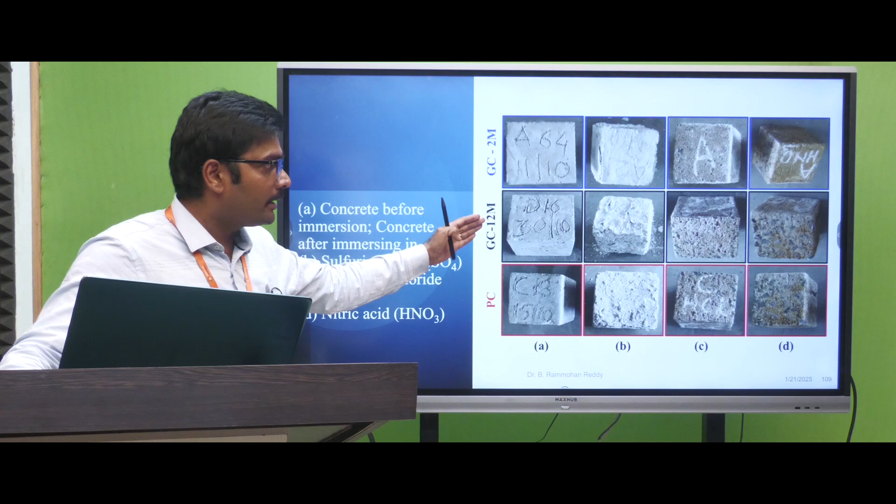And how the geopolymer concrete samples were suffered at different exposure conditions, like through sulfuric acid, chloride, and also nitric acid at different molarities, say 2 molar and 12 molar. According to this author, at lower sodium hydroxide ratios the suffering is less.

And similarly, how the geopolymer concrete samples are changing mass due to immersion in various acid solutions.

And the carbonation test of the concrete, where as we all know carbonation is carbon dioxide infiltration into the concrete. So this is how environmental carbon dioxide is infiltrating into the concrete sample. This can be found using a phenolphthalein indicator.

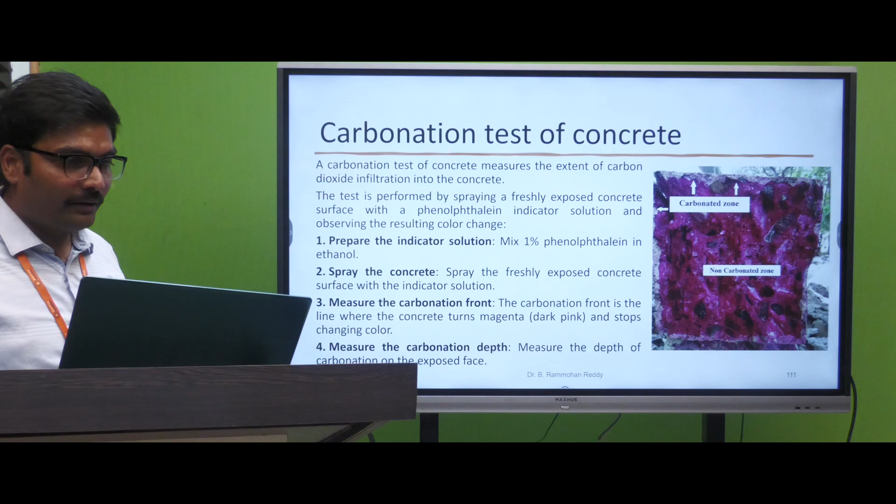If we add 1% phenolphthalein indicator and spray it on the concrete surface, we can find this carbonation effect. Whatever shows a pink color indicates a non-carbonated zone, and whatever is other than pink indicates the carbonated zone. Most authors recommend that geopolymer concrete is more resistant towards this carbonation effect.

Particularly geopolymer concrete with 2% micro silica additive, if you add 2% micro silica content, it produces better results.

Researchers working on geopolymer concrete should know about microstructural studies and how to analyze the geopolymeric reaction, finding some of the predominant equations in geopolymer concrete through microstructural studies, which involve micro studies and macro studies. Studies using microscopic methods give micro studies, and macro studies find mechanical properties through NDT or using UTM or compressive strength testing machines, which evaluate the mechanical and durability properties.

Scaling is high, we can go for millimeters or meters to find macro properties. Coming to micro properties, the scale is microscopic, meaning nano to micrometers, and focuses on internal structure and chemical composition of the sample. The purpose is to analyze the mechanism affecting the properties, whether strength is increasing or decreasing, which can be analyzed through this.

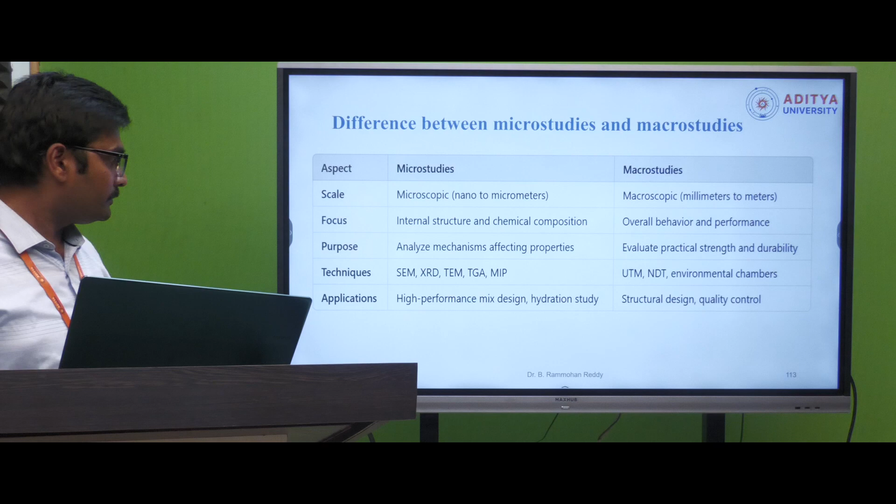These are some of the techniques used in microstructural studies: SEM, XRD, TEM, TGA, DTA and MIP. In many applications these parameters play a major role. Through microstructural studies we can find hydration products like calcium silicate hydrate, calcium hydroxide, or ettringite formation, and at the same time pore structure and interfacial transition zone, or ITZ zone, can be analyzed, along with cracks, voids, and chemical composition.

So these are the techniques which we use: SEM, XRD, EDS or EDAX, MIP, and TGA. TGA is particularly for thermal studies, where we can check if mass loss occurs with increasing temperature.

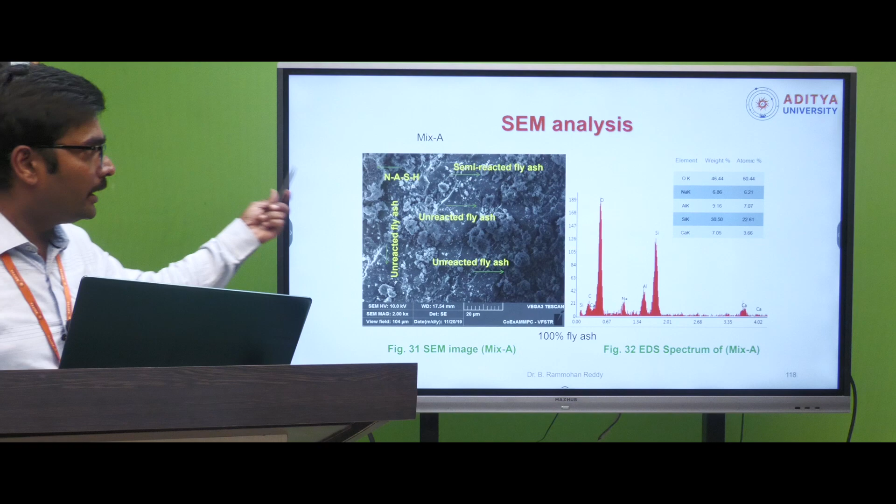These are some of the microstructural studies highlighted by various authors, such as identification of the silica to alumina ratio, C-A-S-H and N-A-S-H gel formations, and identification of unreacted or semi-reacted fly ash particles.

So up to that, various authors presented related to geopolymer concrete, fresh properties, mechanical durability, and also microstructural studies. And here the slide will present the practical work which I have done in my research.

Field performance evaluation - many authors are restricting geopolymer works up to laboratory only, but coming out from the laboratory, the practical usage is less, particularly in our country. For example, Australia already implemented geopolymer concrete in most ready mix plants, producing geopolymer concrete commercially. In coming years, India will also reach that stage of producing geopolymer concrete in RMC plants, when researchers elevate more practical applications on geopolymer concrete.

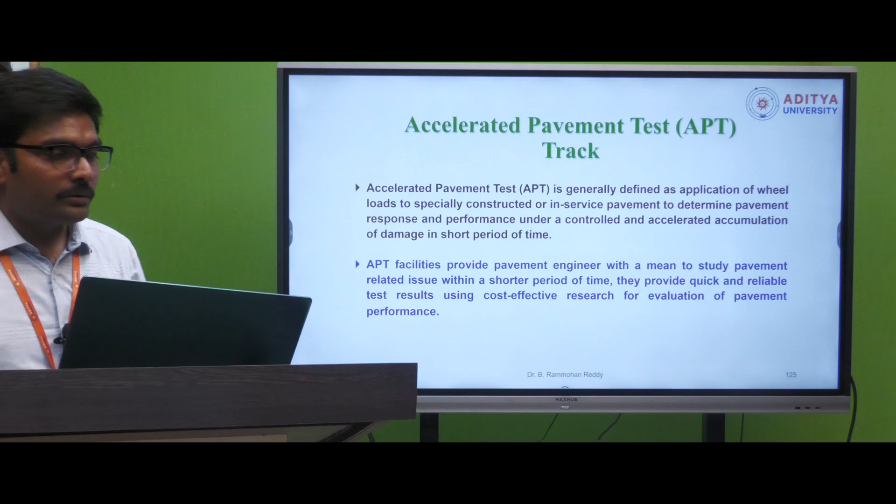Now quickly I will go through the field work which I have done. I have prepared one accelerated pavement test track. These are the dimensions of the track: inner radius is 1.2 meter and outer radius is 3.6 meter.

For the geopolymer track, first earthwork is done, then I filled the subgrade with 40mm metal. After that, compaction was done with a 2-ton vibration roller. Then the total track is divided into 6 portions.

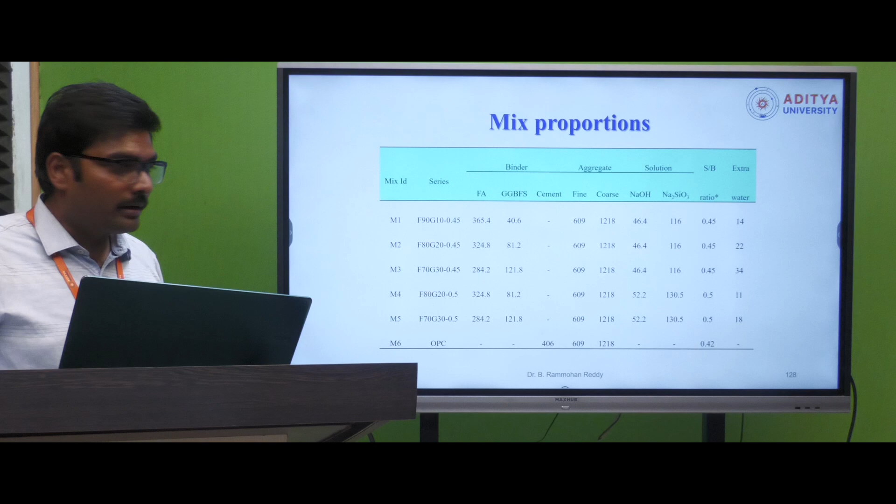In each portion, different mix proportions were selected, like different combinations of fly ash and GGBS. At the same time, different solution to binder ratios were considered. These are those 6 segments with different proportions of the solution geopolymer binders.

Like this, the tracks are cast with different samples along with one ordinary Portland cement sample. At the time of casting the road, different samples were prepared for laboratory tests, to compare the laboratory performance and also field performance of the geopolymer concrete.

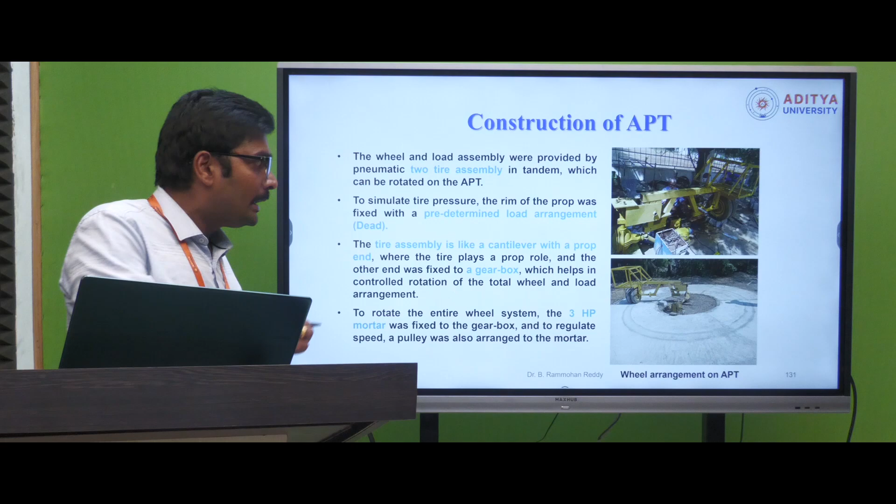And a wheel arrangement is done because this should be a natural road where the wheel arrangement will also be done, and to carry the weights, the carriage is also placed here, and the motor is fixed for increasing or reducing the speed of rotation. These are the various tests performed on the track.

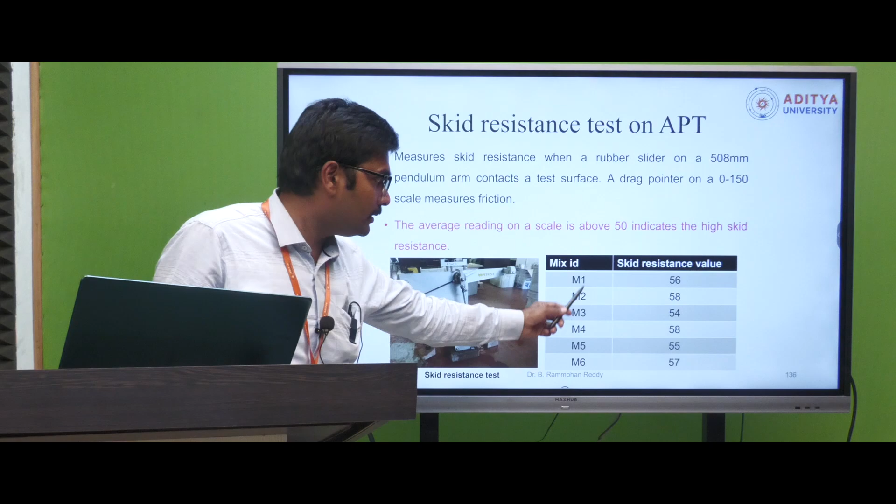Similarly, the compressive strength - we have done skid resistance test on APT, because if it is a road, skid resistance is also important. The average scale indicates here, you can see the scale, 50 and higher is good resistance, so geopolymer concrete mixes all produced better results towards skid resistance.

And RCPT, as I said earlier, the RCPT values are good for geopolymer concrete as compared to conventional concrete. We also performed an accelerated corrosion test, which indicates increasing GGBS content in the geopolymer concrete produces better results.

In addition, a strongly alkaline medium is essential to enhance the leaching of silica, alumina, calcium and other ions. This leaching will play a major role in strength attainment, but the leaching of these ions must be within limit - if it crosses the limit, the strength improvement will reduce.

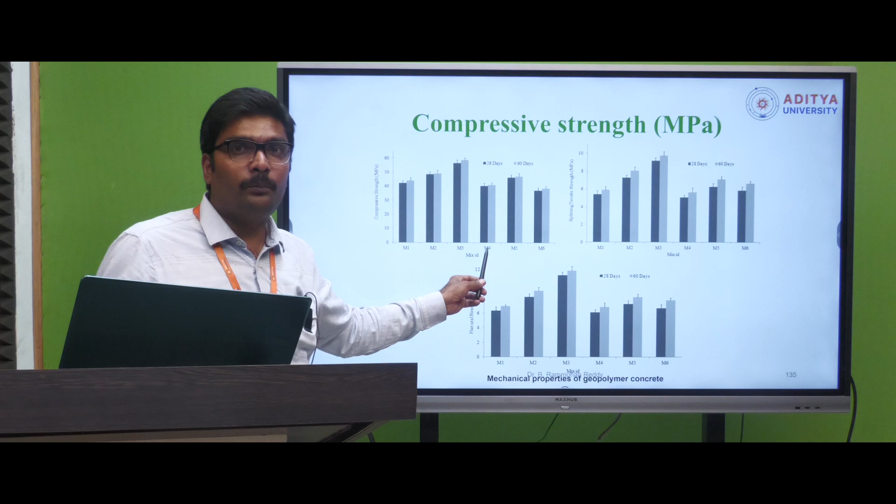0.45 solution to binder ratio gives better results. Further increasing the alkaline media reduces the compressive strength. So these 3 mixes using 0.45 solution to binder ratio gave better strength properties. Further increasing the solution to binder ratio from 0.45 to 0.5, the strength values are reduced - up to a certain limit it is okay, beyond that the strength values reduce.

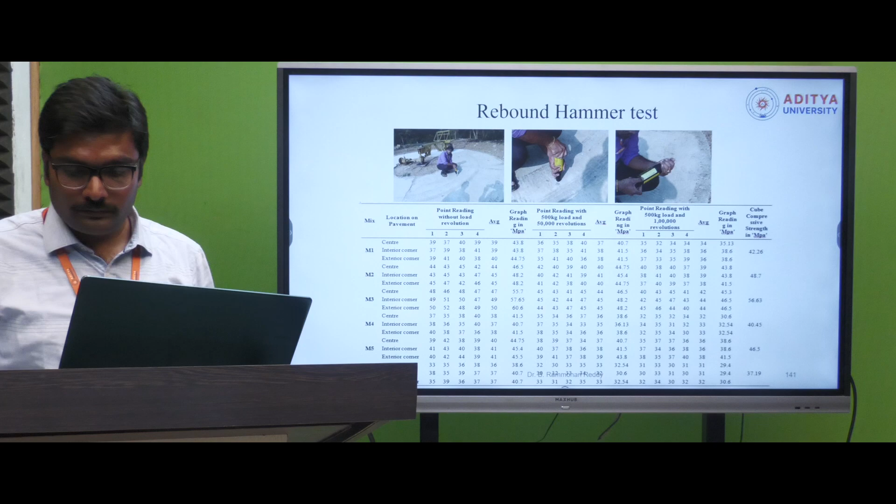Ultrasonic pulse velocity tests indicate the strong matrix which we have observed in all the geopolymer samples. Core samples were collected to find the compressive strength, and we compared the strength obtained through cube test against core sample strength and corrected strength.

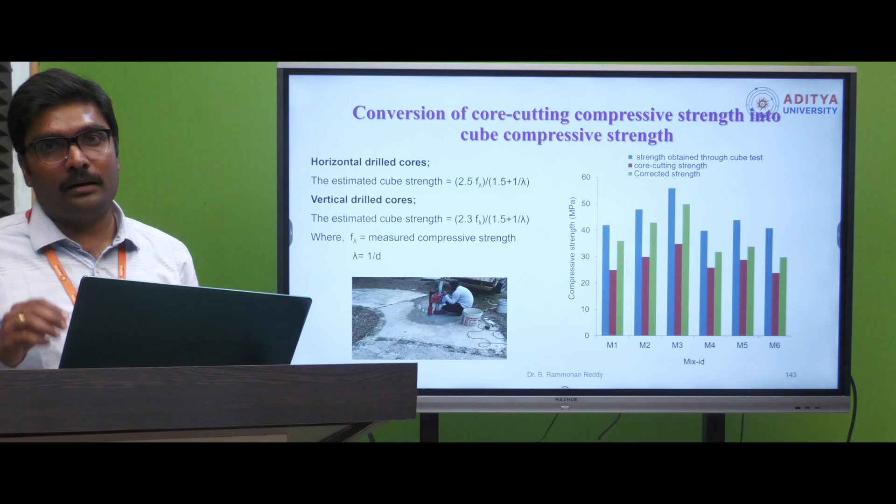These are the equations which we will use to correct the core sample strength to the compressive strength of the cube, either it may be horizontal drilling core or vertical drilling core. And finally...

From this lecture, and from the researchers who worked on geopolymer concrete, it's clear that replacing fly ash with GGBS will give better strength, durability and microstructural properties, where it plays a major role in the geopolymerization. Also, using small quantities of GGBS will avoid oven curing - we can go for sunlight curing or ambient curing. That is another advantage for geopolymer concrete.

Also, while fixing the molar ratio, at the same time the sodium silicate to sodium hydroxide ratio, we should follow the proper mix proportions which are suggested and highlighted by various authors in the production of geopolymer concrete. So these are some of the conclusions.

And the future directions of geopolymer concrete. All researchers should take care about the circular economy, because geopolymer concrete will play a major role in the development of circular economy, particularly in India. Government is saying the development of circular economy will play a major role in the economic development of the country. Also carbon neutrality - geopolymer concrete will play a major role in reducing the carbon dioxide which is produced in cement production, and also global adoption.